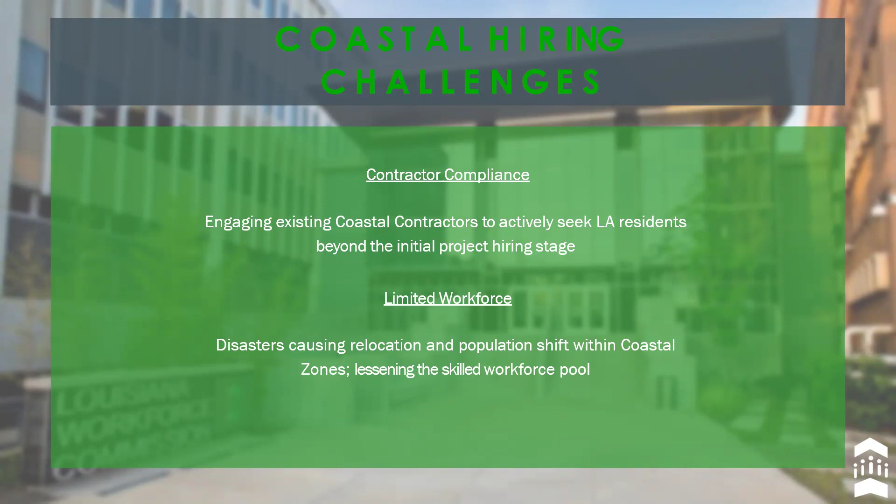And so we recognize that there are some hiring challenges. Some of those are the contractor compliance. And so that goes with engaging the existing coastal contractors to actively seek Louisiana residents beyond the initial project hiring stage. And so again, it goes to us being available at LWC to help continue to do the awareness, continue to do recruiting if that is what's needed. So it's not we put one ad out, we made one call to action and no one showed up, and then you hire from outside of the state.

We will continue to work with your organization or your business to aid you in staying in compliance, not just the spirit of compliance, but true compliance. And so that may look like 1 or 2 or 3 or 4 or more hiring events, but we're willing to do that and provide that service. And it doesn't cost anything to take advantage of these services from LWC.

The other challenge is the limited workforce. And so disasters have caused relocation and a population shift within the coastal zones. And then we understand that there's also a lessening of the skilled workforce in that labor in those areas. And so those are some things through partnership, through understanding what your organization provides, what you're needing. There may be an opportunity to partner with the local workforce development board who has training dollars for education.

We have the Coursera partnership, which is paid for through LWC. So there would not be a cost for you if you had an employee, current or potentially new, that you would like to gain a skill, be upskilled in. There's no cost for that. And so that's a part of what the partnership in LWC can offer to you as well.

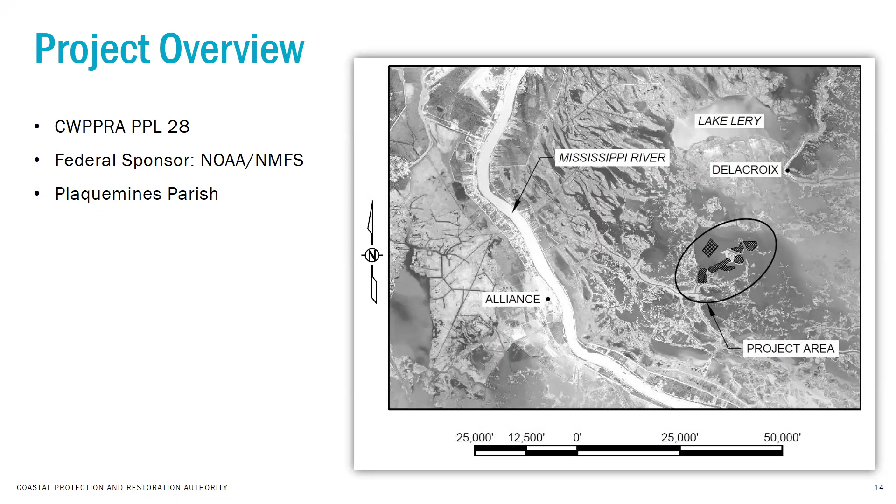So my name is Alex Holston, and I'll be presenting first on the Breton Land Bridge West Marsh Creation Project, or BS 38. So just a project overview. It's part of the CWPPRA program proposed in PPL 28. Our federal sponsor is NOAA, and it's in Plaquemines Parish.

So last industry day, this is what the project looked like. But since then, due to kind of a heads up from a nearby project, BS 32, we realized we needed to do some additional surveys of our project due to the changing landscape. So we did that in the fall, and updated the shape of our project.

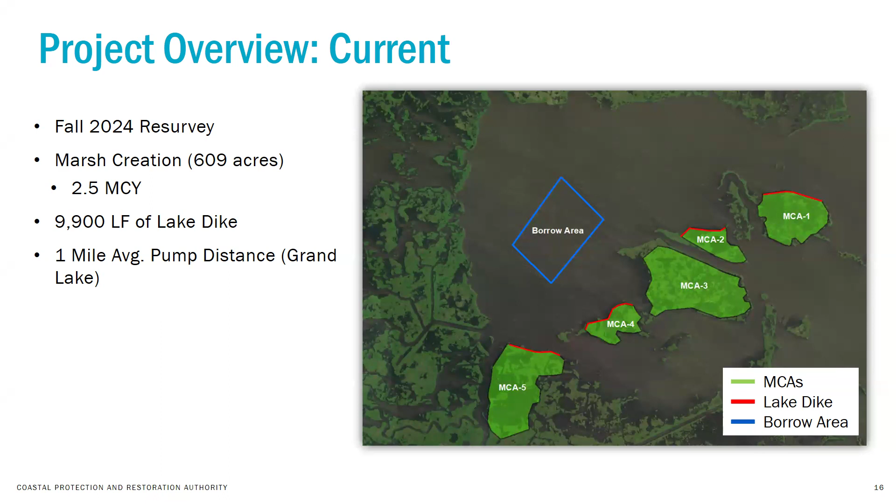So this is the current layout of the project. So currently we have 5 marsh creation areas, a total of 609 acres. That'll take about 2.5 million cubic yards of fill. About 10,000 feet of our lake dike feature, which is shown in the red on MCAs 1, 2, 4, and 5. And it'll use a nearby borrow source from Grand Lake.

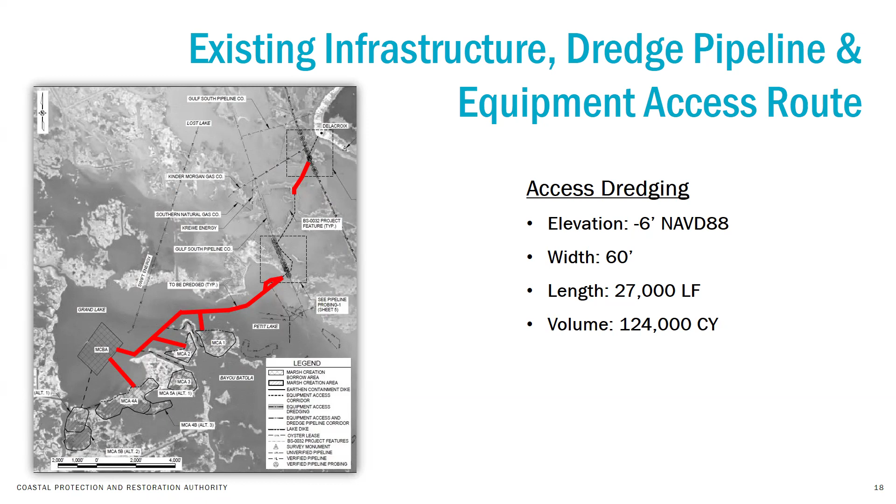And this slide also shows some areas where we've designed for access dredging, shown in the red. So any areas that are shallower than -6, we put in access dredging to allow for larger equipment to get to the project and help construct our lake dike features. So the template is down to a -6 elevation, 60-foot width, total length of about 27,000 linear feet, and total volume of about 124,000 cubic yards.

So onto the project features. Our earthen containment dikes will be built up to a +4 elevation with a 1/4 foot plus or minus tolerance, 5-foot crown width, 4-to-1 side slopes. Total containment dike length is about 40,000 linear feet. They'll utilize interior borrow that'll be backfilled.

And for the marsh creation areas, constructed marsh fill elevations, MCA 1 will be built to a +2.25 plus or minus 1/4 foot tolerance. And then the other MCAs 2 through 5 will be built to a +2.75 elevation.

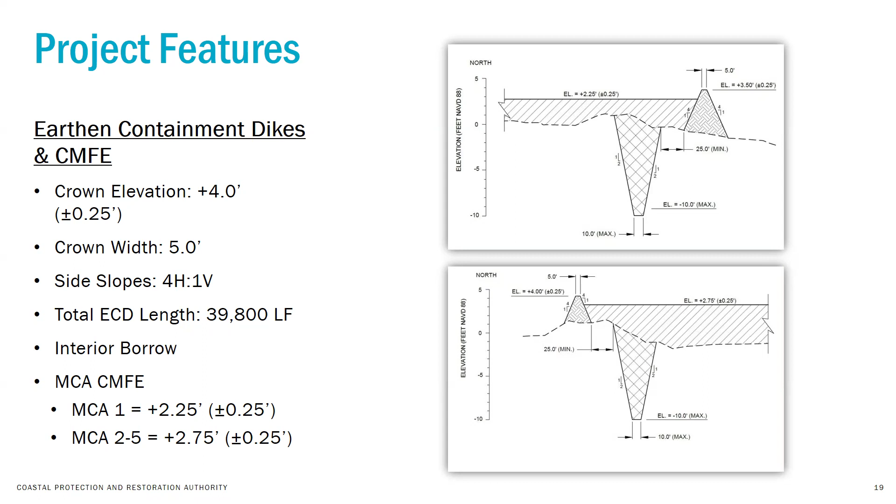And then for the borrow source, it's pulling from a nearby Grand Lake location. The average depth in the lake is about -5 foot elevation, and the cut depth will be down to -20, so 15 feet. The material in the borrow is primarily lean and fat clay layers mixed with a silt layer. And the 194-acre area contains about 4.5 million cubic yards available.

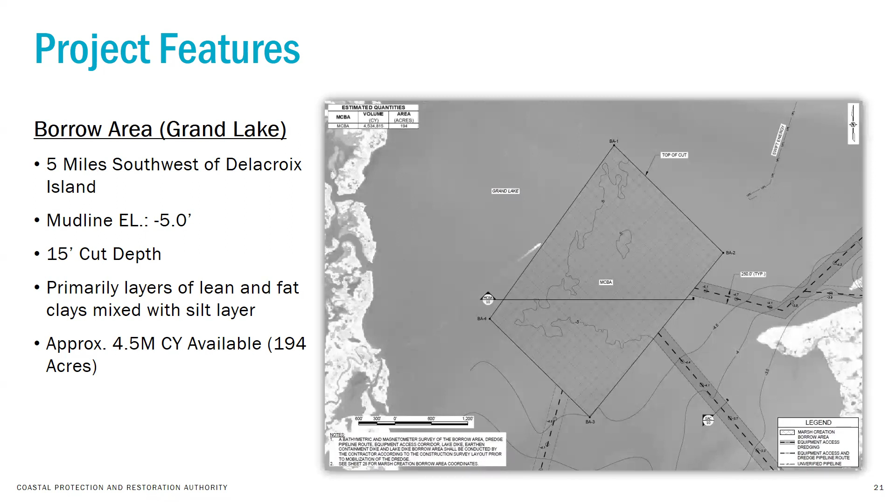And so the schedule for this project, we received phase 2 approval in January of 2022, received our construction permit in January 2023. The anticipated bid advertisement is this fall, and the estimated construction duration is 570 days. And I think we can take any questions that anybody has.

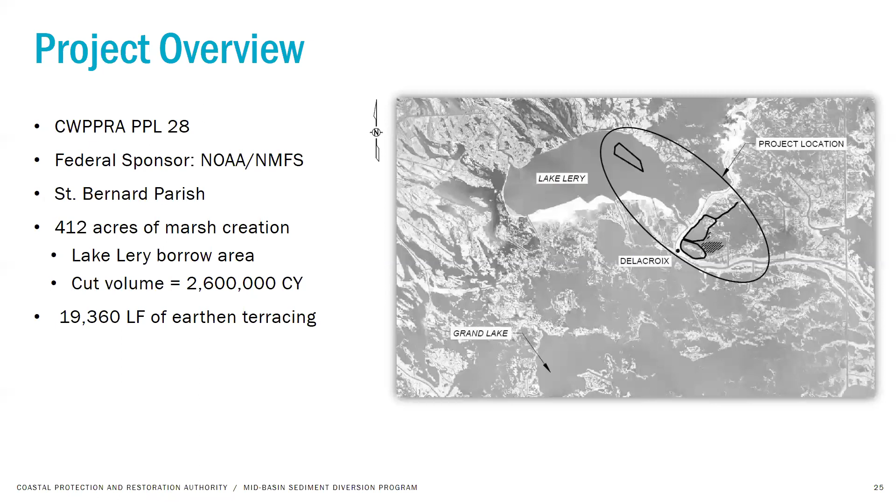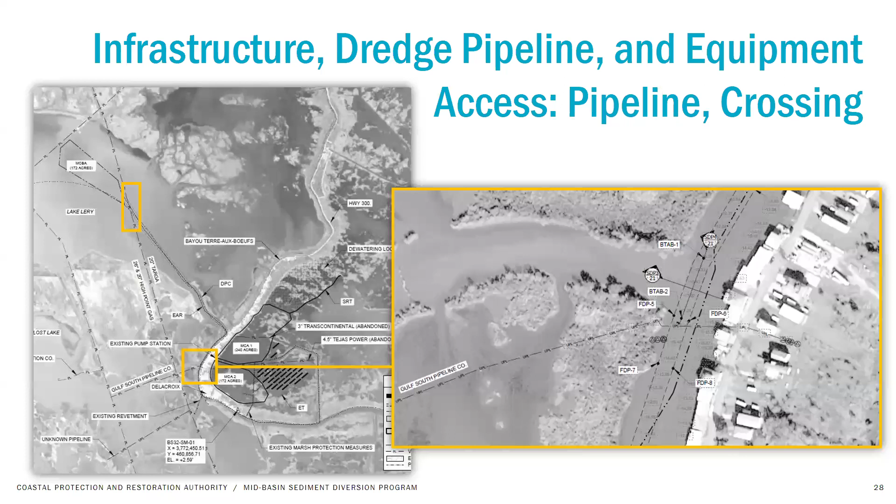And so this slide shows two locations where we have pipeline crossings. So the first one is showing just outside of our borrow area. There's 3 pipelines together where we will float the dredge pipe over in Lake Lery. And then near Delacroix, there's a single pipeline, a Gulf South pipeline, where we'll also float the dredge pipe over. And just ahead of that, there will also be a navigational crossing where Bayou Terre-aux-Boeufs connects to this waterway.

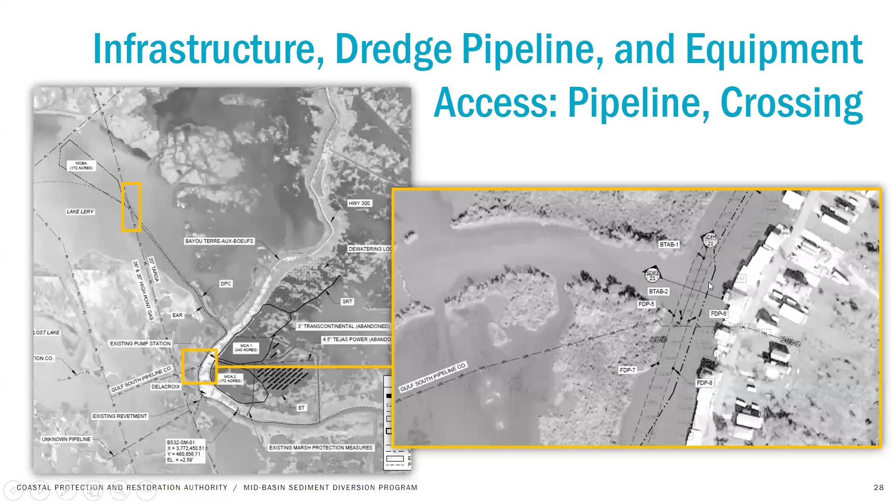And then we've got some measures in for protecting marsh and timber mats on the other side for any equipment crossing. But the details of that slip usage and cleanup are still being hammered out with the parish. But nearby, just further east, there's another route where we could cross and enter to get to the cells.

So for the project features, this is the borrow area from Lake Lery. It's about 6 miles pump distance. The existing elevation is about -5, and we'll have a cut elevation down to -20. The material in the borrow is a majority fat clay. And there is one avoidance area on the south edge of our cell that's a sunken boat. So we've got a 100-foot offset for that.

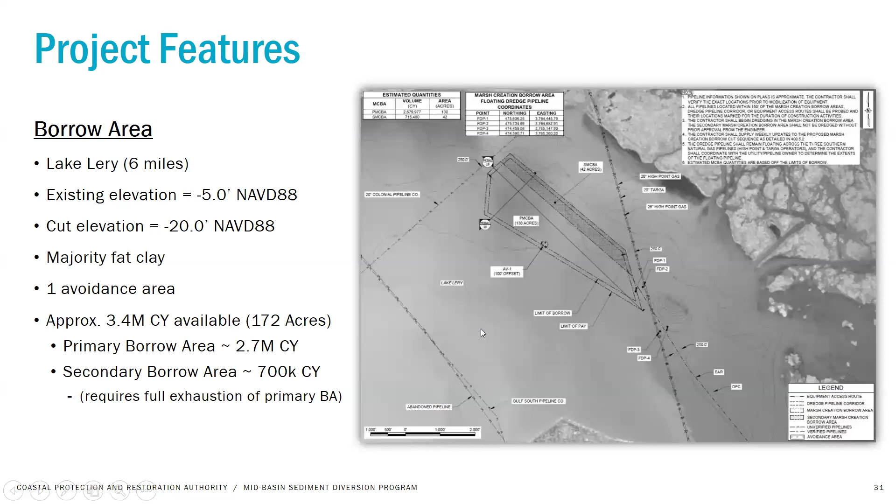For the marsh creation, total of 412 acres, both filled to a plus 3.25 with plus or minus quarter foot tolerance. MCA 1, the northern cell, is 240 acres with a cut volume of about 1.6 million cubic yards. The southern cell, MCA 2, is 172 acres with a cut volume of about 1 million cubic yards.

For the earthen containment dikes, they'll be built up to a plus 5 elevation, 5-foot crown width, 4-to-1 side slopes, about 16,000 linear feet. They will utilize interior borrow outside of the 4 highlighted areas.

We have 2 abandoned pipelines that cut through the cells, so in these areas we've got no excavation zones. On the west side of MCA 2, there's enough depth of cover, so the design will be to have that location as an equipment crossing spot for going over the pipelines.

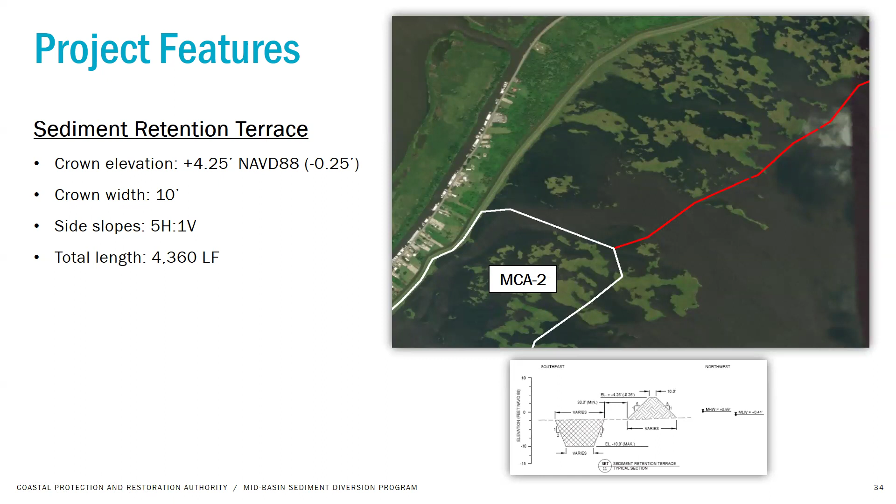Looking northeast off of that southern MCA 2, we've got a sediment retention terrace, the red line coming to the northeast. It will be built to a plus 4.25 with minus quarter foot tolerance, with a 10-foot crown width, 5 side slopes, and about 4,000 linear feet of that feature.

East of the 2 MCAs, we have a terrace field, 30 total terraces built to the same specifications as the previous retention terrace: plus 4.25 elevation, 10-foot crown width, 5 side slopes. Each terrace will be 500 feet long, for a total of 15,000 linear feet, spaced center line to center line, 250 feet apart.

Here's a summary of the estimated quantities. Key items: about 16,000 linear feet of ECDs, a total of about 19,000 linear feet of terracing, and 2.6 million cubic yards for MCA fill.

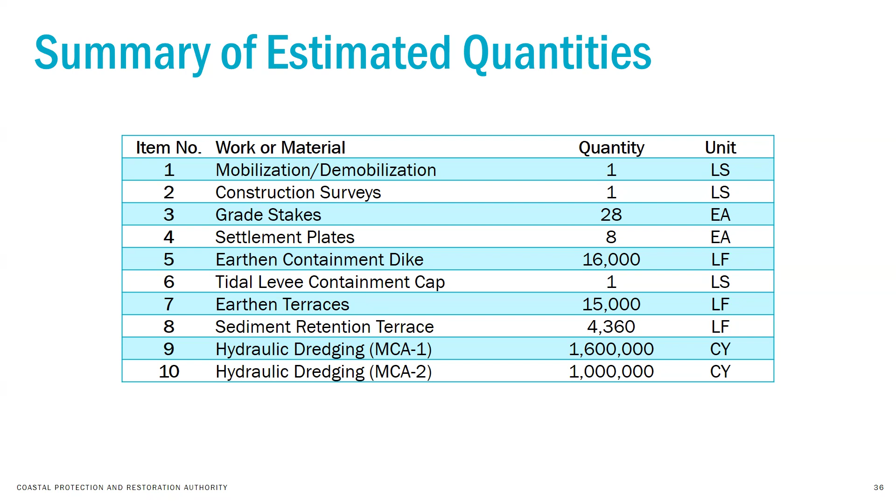For the schedule of this project, phase 2 funding was approved early last year. Their construction permit was received in Q3 of 2023. The anticipated bid advertisement will be Q3 or Q4 of this year, with an estimated construction duration of 550 days.

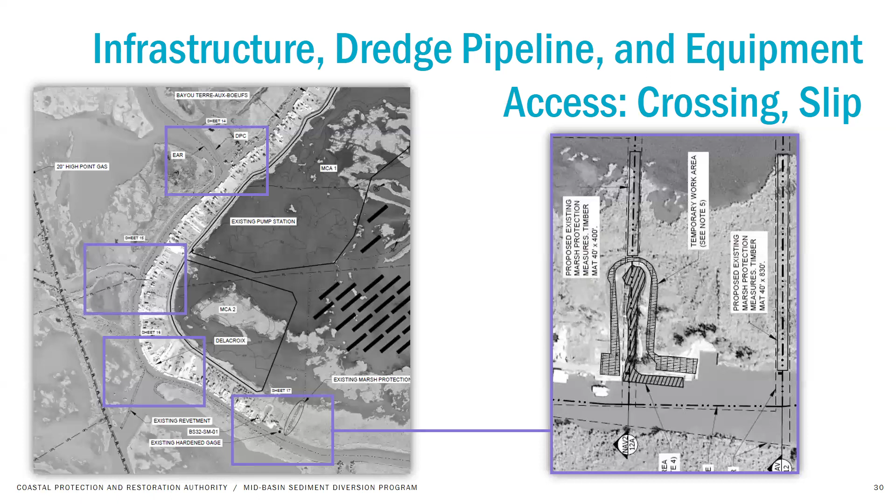Couple slides back, the non-excavation area for the dikes, the red boxes - how big are those red boxes for the non-excavation? Do those go through the containment? For those in attendance, the question has to do with some no-excavation areas near the containment dikes, asking the scale of them, and if they go through. We haven't built the levee through there. Just for clarity on how to construct the containment levee in areas that don't have excavation allowed within - I think relatively speaking it's going to be probably a pretty small footprint of no-work, no-excavation area, but I'll check on that. Yeah, I think the distance is 75 feet, and it will have containment built across it.

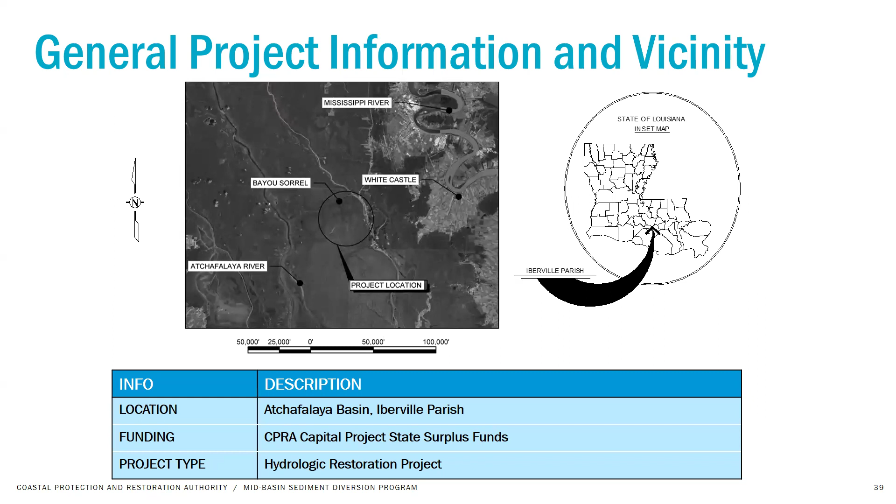All right, just an overview of the project. Again, the intent here is to do some spoil bank gapping and some shallow excavation of some existing old bayous, channels, little creeks to try to improve flow from the north to the south in the basin.

We're excavating about a total of 16,600 yards. That number here on the slide was updated with a recent design submittal we did last week. So again, that number is about 16,600 yards that we're going to be excavating from a total of 12 different sites. There are 3 sites off of the Protection Levee Canal to the east. We have a total of 7 sites off of Florida Gas Pipeline, and we have 2 sites off of Bayou Sorrel.

So Bayou Sorrel and the Protection Levee Canal both are fairly deep water access routes. To access off of this pipeline canal, you do have water access down in Saltmont Bayou up into the pipeline canal, but after that point, depending on the water levels, it's not going to likely be any kind of floating access down that canal.

So some of the project features. Again, we got 3 basic typical sections that just have to do with where we're excavating and where we're going to be placing the material. So this typical section here applies to 3 of the 12 sites that I mentioned.

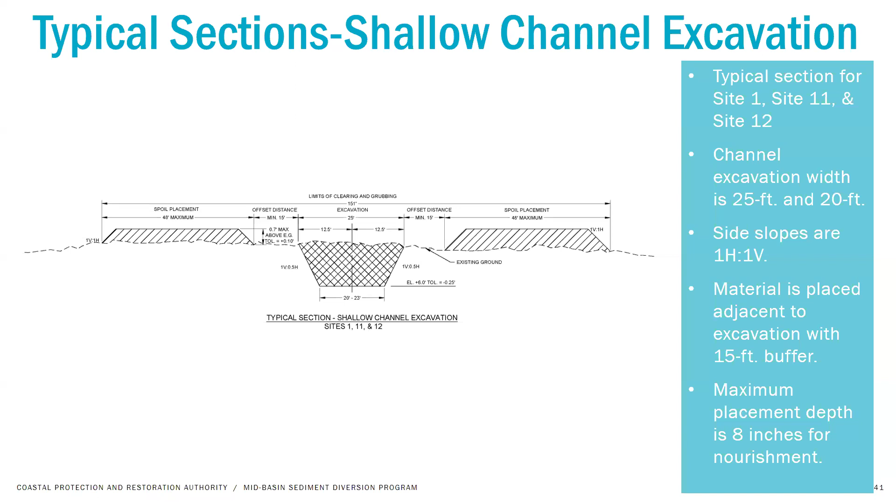Again, the idea here is to excavate a channel at some existing old bayous about 25 foot wide, and we're placing the material adjacent to the excavation here. The width of our placement varies, of course, depending on how much material we're going to be digging. And the placement depth is going to be limited here to about 8 inches, and that's to not change any habitat or encounter any mitigation requirements based off of this work here.

This is another typical section. This typical section here applies to work that's going to be taking place along the Florida Gas Pipeline. It's 7 of the sites. Again, we're going to be cutting gaps in some spoil banks on the pipeline canal. Most of them are 100 foot wide. One of them at the end on the west end is 50 foot wide. And the material that we cut out of those spoil banks, we're going to be placing adjacent to it back inside the pipeline canal.

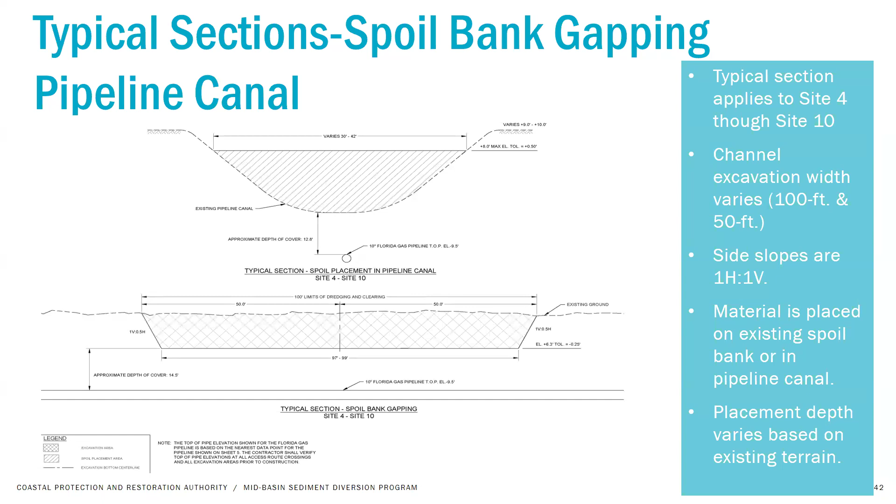This is the last typical section of excavation here and placement. This applies to 2 sites off of the Protection Levee Canal, sites 2 and 3. Again, we're going to cut about a 25 foot wide gap in some existing spoil banks. Place that material adjacent to those cuts on the actual spoil bank themselves.

This just gives an idea of the location of some of the features that I mentioned. This is sites 1, 2, and 3, off of the Protection Levee Canal on the east side of the project area. Again, site 1 to the north. This is one of those shallow bayous that we're going to be re-excavating and cleaning out, and we're placing material adjacent to that cut.

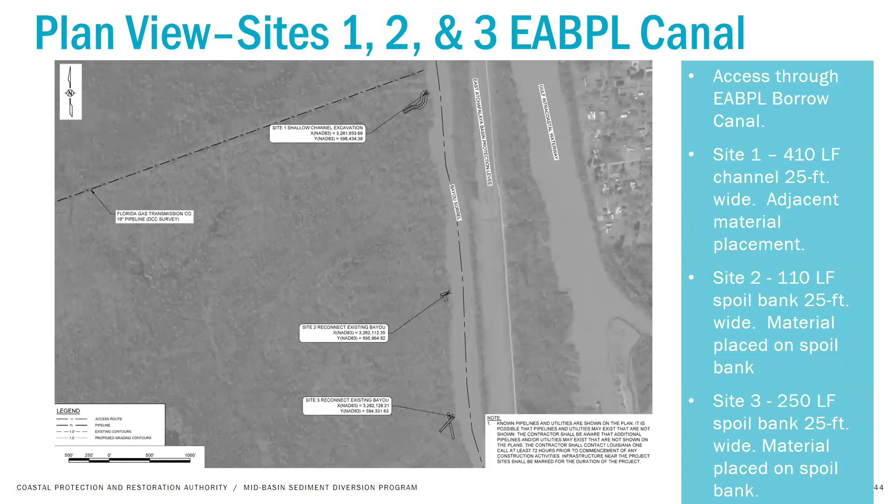Sites 2 and 3 on the southern end here, right off of the channel. Those are going to be gaps cut in the spoil bank with the material placed back on the spoil bank. Again, the length of these sites vary. The longest one is about 410 feet, that's site number 1. Site 2 is about 110 feet, and then site 3 is 250 feet long.

This is, again, just a little more information on the sites off of the pipeline canal. This is sites 4 through 10. Again, most of these we're going to cut a 100-foot gap in each of the spoil banks to allow some water exchange from north to south. Site 10 all the way to the west, that's going to be a 50-foot cut in the spoil bank. Again, this material that we take out is going to be placed inside of the pipeline canal.

Our last two sites, this is 11 and 12 off of Bayou Sorrel. Again, these are some old silted-in bayous that we're going to be cleaning out. Site 11 is 1,900 feet long. Site 12 is 2,170 feet long. We're going to cut a 20-foot channel through there and place the material that we cut adjacent to that excavation on either side.

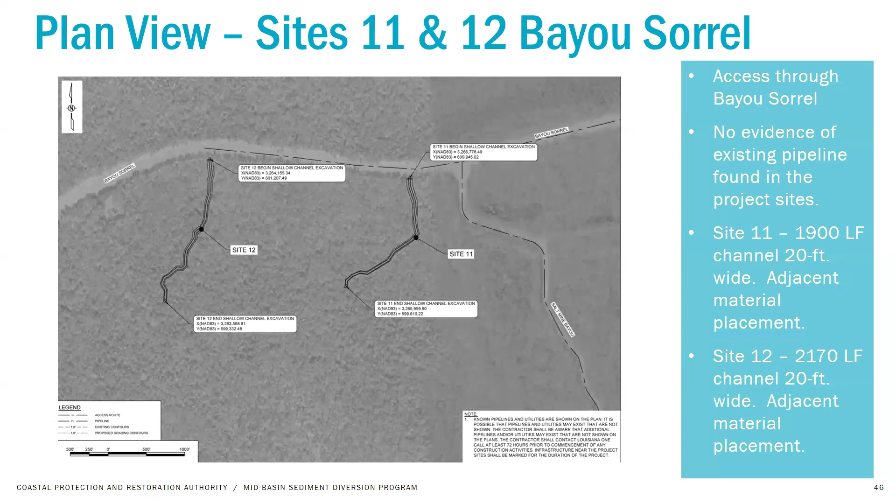All right, any questions?

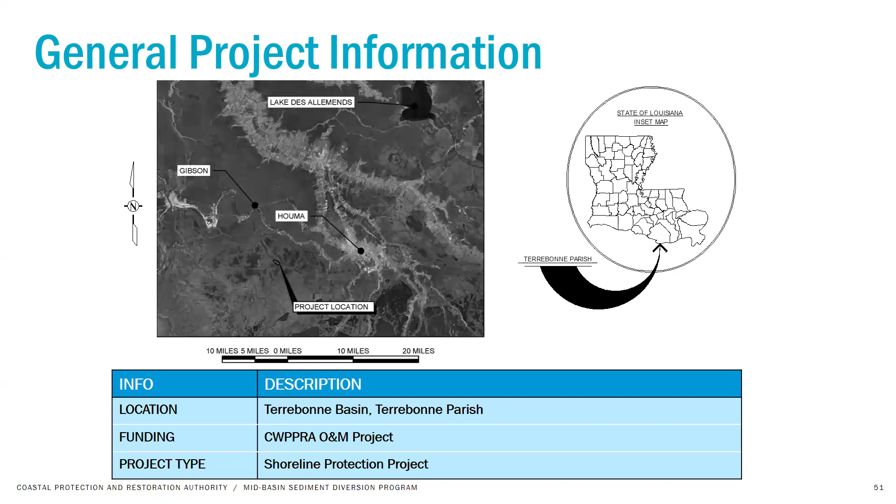This is just a closer view of where our project features are located, near the Lake Hackberry feature off the GIWW. We have 4 different sites where we're going to do shoreline protection at areas that have experienced a lot of erosion and channelization.

Most of the marsh in this area is what they call floating marsh, so continued wave action from passing boats just causes it to eat away.

So there are 4 different sites there. We're proposing to do some shoreline protection here, a total of about 2,500 feet of shoreline protection feature.

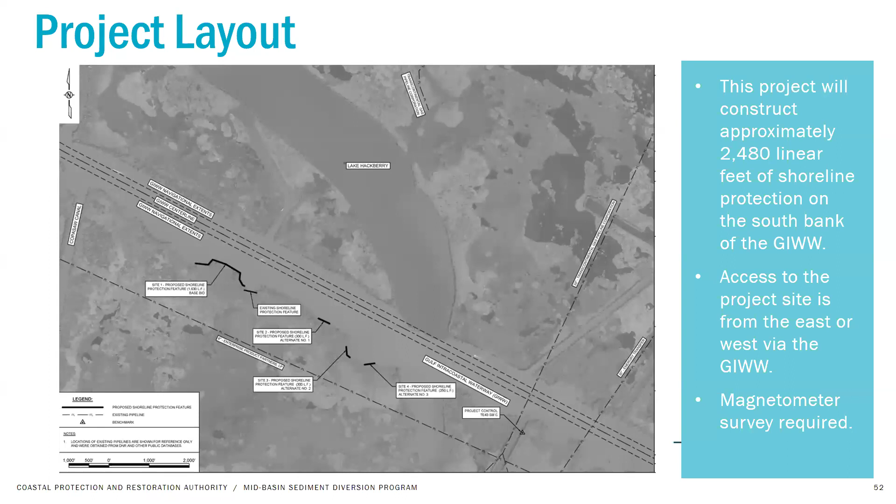The soil conditions out here are really bad. Previous attempts at shoreline protection using riprap and lightweight aggregate cores were successful for a period of time, but they experienced a lot of settlement. So this is the feature we're going to use on this project.

This particular type of feature was used on a demonstration project a number of years ago, a little further to the east, closer toward Mandalay. It seemed to function pretty well in breaking waves and retaining sediment behind it.

Again, another view of the shoreline protection. I mentioned the existing rock dike that's present. So our idea is to install that timber fencing just on the land side of the rock dike, with about a 10-foot offset.

There should be adequate water depth to get a material barge with a crane on it up to the dike and still be able to make that reach and drive those piles.

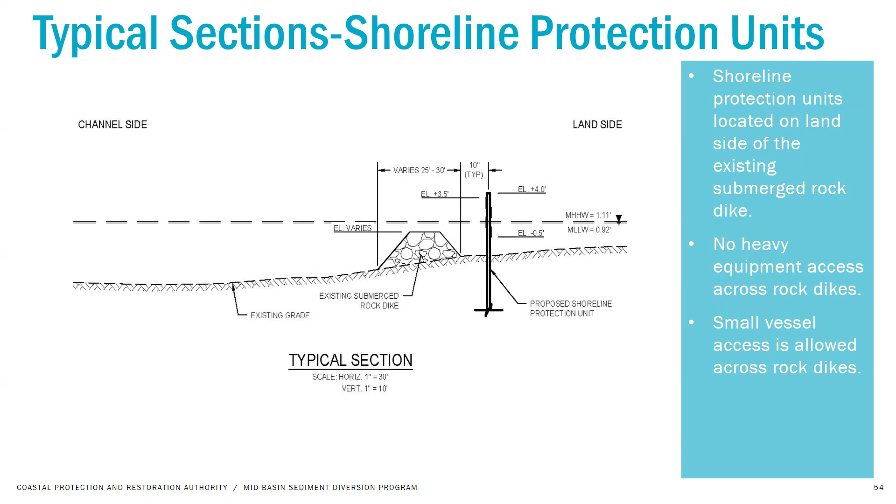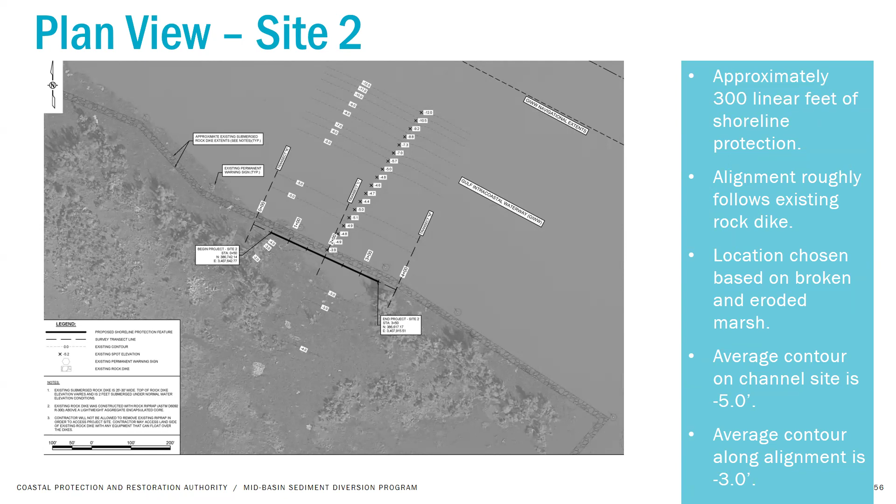The second site, like the rest of the sites, is a little shorter than the first one - this one's about 300 feet long, not too far from the first one. These are all relatively close to each other. Again, -5 on the outside, about -3 on the inside here.

Summary quantities: total at all 4 sites, we're looking at about 216 pilings and just under 30,000 board feet of timber fencing that we plan to use on this project.

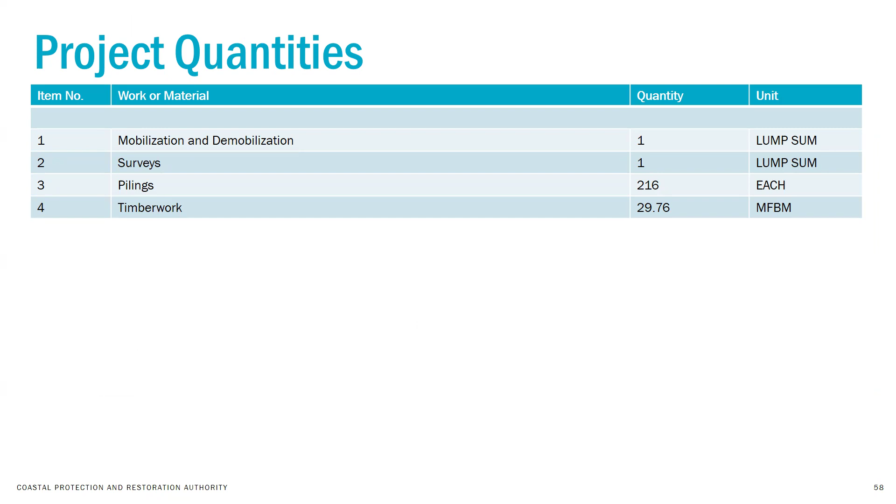The schedule: we submitted permits on this back in January. We have completed construction documents this month in March. We anticipate receiving permits in a few months, sometime during the summer. Soon after that, August timeframe, we will advertise for construction bids, with a construction timeframe starting sometime toward the end of the year. And again, we estimate about 60 calendar days required to complete this project.

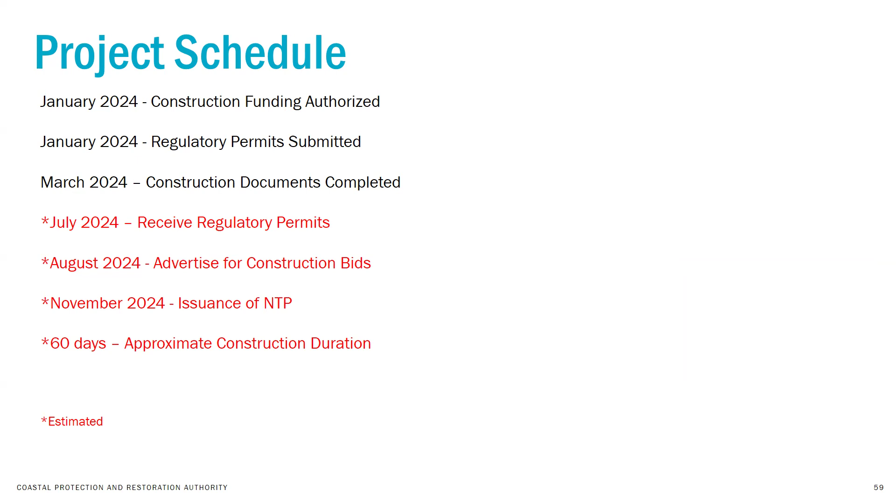With that, I'll open it up to any questions. Yeah, thanks, Kevin. I'm looking at the chat box. I don't see anything yet here. Give them a couple of minutes or so. If anyone has any in the room, please do ask away.

I guess hearing none, to try and get through the rest of the agenda, we're gonna have Mr. Steve Dartez, coastal engineering consultants, come up and discuss the TE 176 West Belle Headland Repair Project.

Afternoon, everybody. For some of y'all, this may be deja vu. So I'm here to talk to you about the West Belle Headland Repair Project, TE 176, which is basically to reconstruct what we lost in Hurricane Zeta during construction of the TE 143 project. It's in Lafourche Parish, just west of the Belle Pass jetties or Port Fourchon.

For borrow areas, we're going back to the OCS. We're expanding 2 previously excavated borrow areas that had cultural clearance. And for pump outs and conveyance corridors, we'll be reusing the 2 pump outs for West Belle that were used during the 143 project over by the pass. This project's being funded by FEMA.

So the template is basically the exact same template we had in 143, just a little shorter because they're only paying for us to replace what was lost at the time of the hurricane. So in blue and red, that's your beach and dune, and then in green is your marsh. One of the differences between this particular template and the previous one is this one will all be out of sand from the OCS. So containment is not required for this one.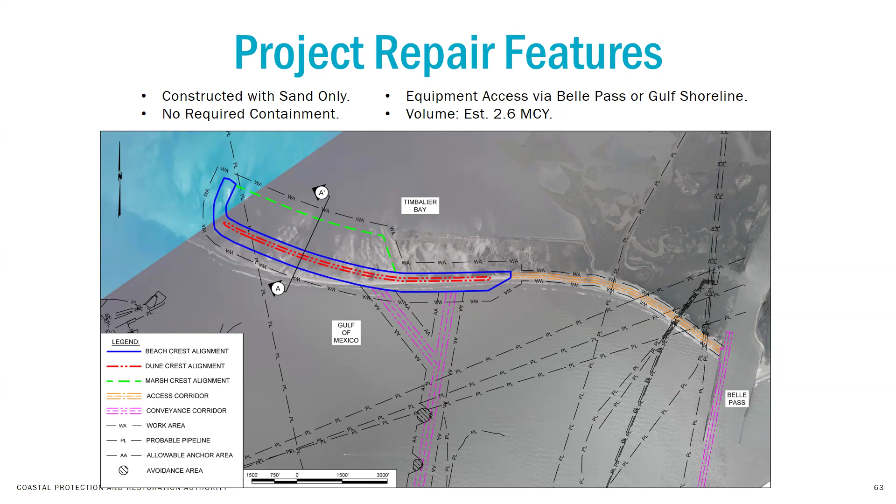We estimate that we have a 2.6 million cubic yard volume requirement that will be updated shortly. We'll be doing resurveys in the next month or so and getting those updated. Equipment access will be from Belle Pass or from the Gulf shoreline. Our previous access channel now is in much shallower water, and it was deemed to be not very effective to go back and redig that. In magenta, there are conveyance corridors coming in from offshore. And I'll get to those a little bit in a minute.

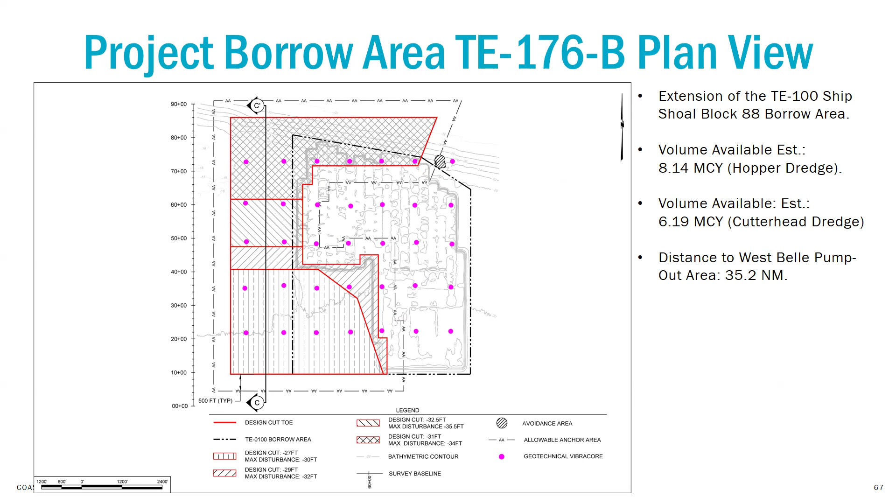And again, just a little cross section there showing our -27 down to -32.5 on the cuts. Conveyance corridors, I mentioned we used these previously in 143. The cyan hatched area is the old West Belle Marsh borrow area. That will be reused as a pump out area again.

The magenta lines are a conveyance corridor coming from this pump out area. They're 300 feet wide with a 250 foot per side allowable anchorage area. There are 2 avoidance areas near this corridor that we'll have to be cognizant of when utilizing it. It also includes the spur that we would put in through a permit mod during the 143 project.

The pump out area has got an average depth of about -33 based on our 2021 post-construction surveys, which were post-Ida. And then the corridor runs from about -28 up to the shoreline for that.

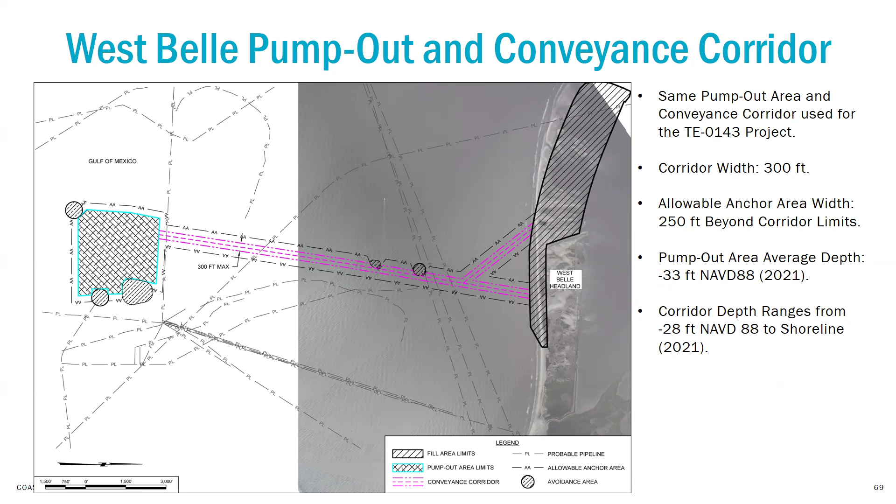The West Belle feeder beach pump out area, sorry for the West Belle being repeated so much, but that's what it is, was put in as a permit mod during the construction of 143 after the hurricanes. And it's just south of the Belle Pass jetties. The corridor runs actually between the navigation channel and the jetties. And then we come ashore where we constructed the West Belle feeder beach.

So the average depth in that pump out area is about -33 to -35 based on those post-construction surveys, and runs from about a -30 at the pump out area up to -10 where it joins in right here with West Belle feeder beach.

So the access I mentioned was from across the feeder beach. So equipment can come across the rocks, run along the shoreline, and you can just see the template sticking in right here on this image for access. Or if the weather conditions allow, you're welcome to bring any equipment you want into the work area from the Gulf side.

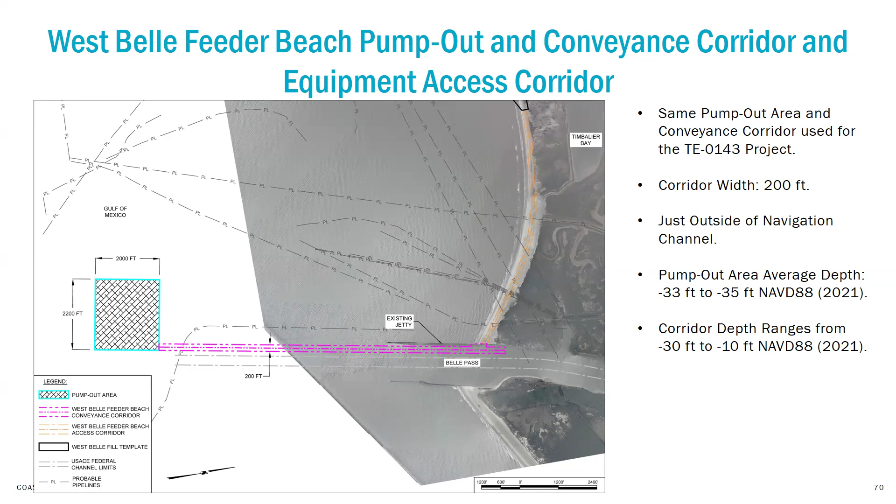Thanks, Steve. Yeah, some critical work there. First line of defense we'll talk about. Like your deja vu reference. Yeah, I knew it was coming. Anyone here in attendance, feel free to ask away. I'm looking at the chat box as well. I see one, Chuck Broussard.

Yes, sir. Have you tried to request a variance in your existing permit to allow for the service? Just to repeat, the gentleman's question had to do with pursuing a variance from a permit perspective to allow for additional disturbance. It looked to be about 3 to 4 feet based on our... They were 3 feet, and as in prior, it really has more to do with our negotiated agreement than the permit. And we can investigate that in due time with those agencies. We don't have... you can speak to the mic... we don't have our NNA just yet. So obviously you want to get that in hand first, and then we can evaluate that. But similar to previous experiences. But that's why I split the volumes up for you.

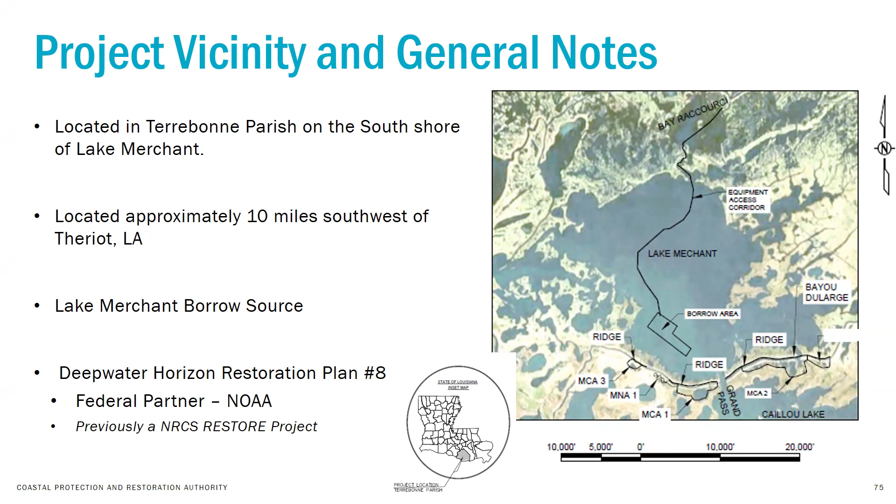Good afternoon. Like you said, Dylan Olson, I'll be presenting the Bayou Dularge Ridge and Marsh Creation, TE 170. The project is located in Terrebonne Parish, about 10 miles southwest of Theriot, Louisiana. It'll be a Lake Merchant borrow source, and this is a Deepwater Horizon Restoration Plan #8 project with the federal sponsor of NOAA.

The project includes 3 marsh creation areas and 22,400 linear feet of earthen ridge. The MCAs will be broken down to MCA 1, 2, and 3, as seen on the east and west side of Grand Pass here. There will also be 27,000 linear feet of earthen containment dikes. And as seen in the purple, we will also have 23 acres of marsh nourishment.

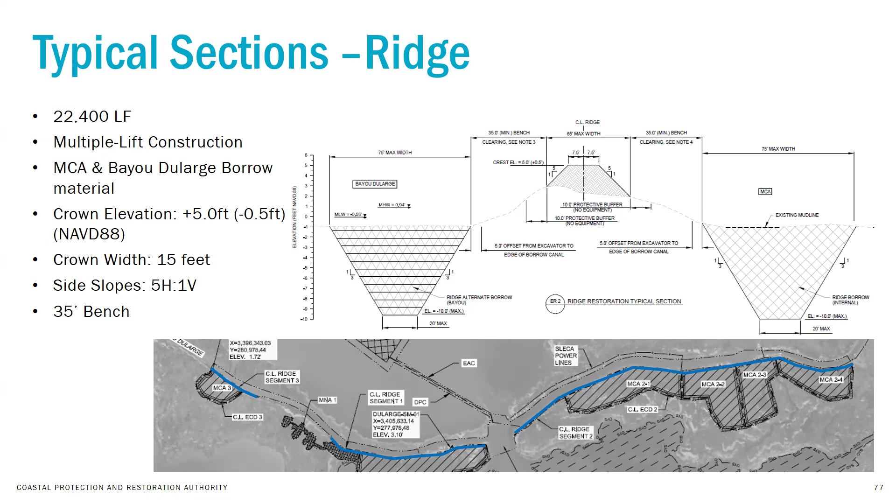Here's the typical section for the ridge. It will be a multiple lift construction using sources from within the MCAs where applicable and within Bayou Dularge where there is no MCA adjacent. The ridges will be built to elevation of +5 with 15-foot crown width and side slopes of 5 to 1. There are some camps along the existing ridge, and we'll have to build behind those to accommodate those.

Here's the typical section for the ECD and marsh fill. There will be 27,000 linear feet of ECDs built to 4.5 feet with 5-foot crowns and 4 to 1 side slopes. The max slurry elevation will be 3 to 2.5, depending on which MCA. And the existing ground in the area is approximately -2 in the water area and 0.6 where there's marsh.

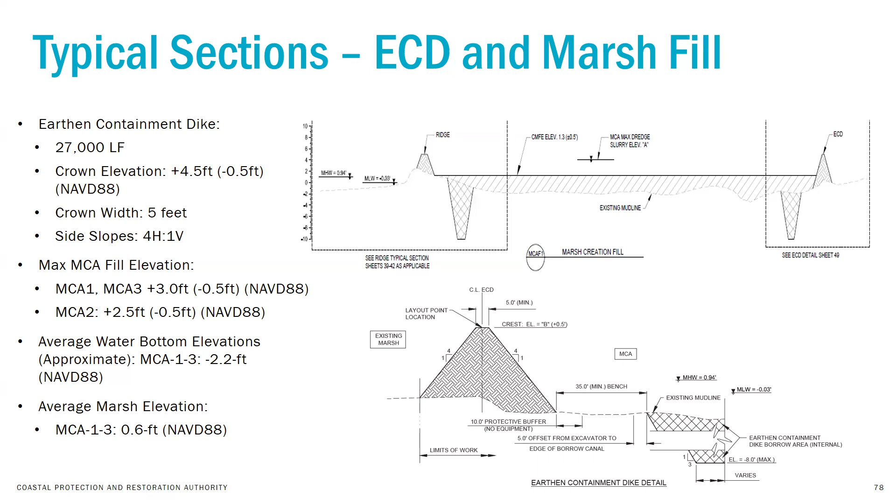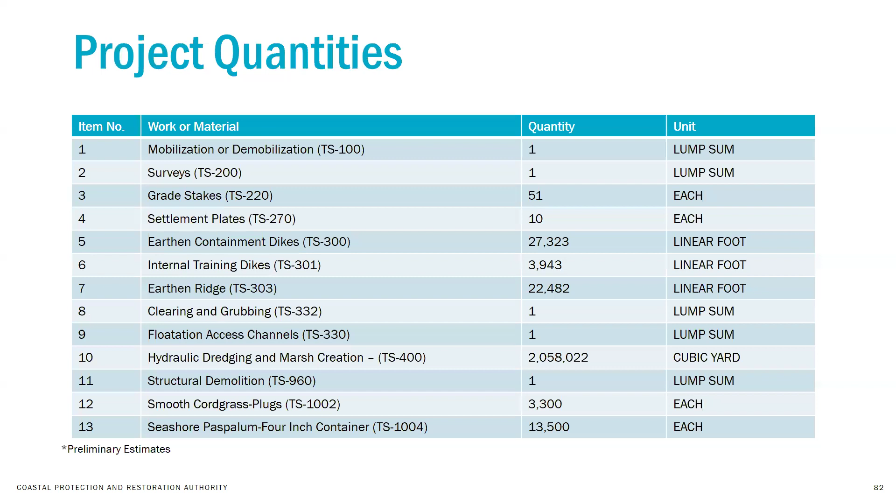Here are the project quantities. We mentioned most of these. Items 12 and 13, we will have vegetative planting along the ridge. That's what's shown here. Currently, we are doing some additional data collection and hoping to finish that up maybe this summer, where we'll move into final design and hopefully have land rights done by the end of this year, where we can then advertise for construction. Anticipate construction duration of 500 days. Questions?

Thank you, Bill. I'm looking at the chat. I don't see any yet. So we got one from Chuck Broussard. What's the depth of the access? The slide is too small. Yeah, the question was the depth of the access channel. -6 depth with 60-foot wide. Only permanent. Yes. I think that Tennessee gas pipeline is -13.

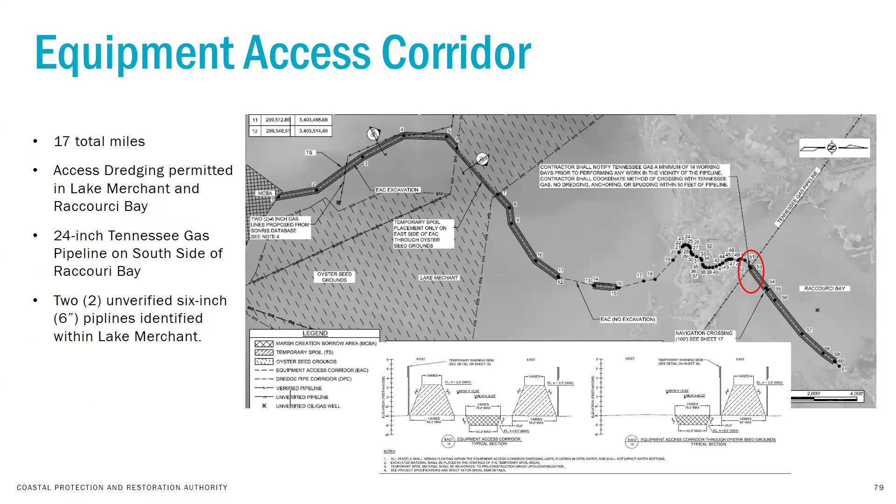It is adjacent to two recently constructed projects, the PO 33 Goose Point project and the PO 104 Bayou Bonfouca project, both to the southeast. Like those two projects, it also proposes to construct marsh using a Lake Pontchartrain borrow source, and it was approved under CWPPRA for phase 2 funding in December of 2022, with U.S. Fish and Wildlife Service serving as the federal sponsor.

So this slide shows a layout of the entire project area. I'll briefly go through each of these features on this slide and then get into details of them through the rest of the presentation. There's a total of 7 marsh creation areas spanning approximately 633 acres and requiring about 2.5 million cubic yards of fill material. All 7 of the marsh creation areas will be fully contained, and that amounts to about 62,000 linear feet of earthen containment dike, some of which will be constructed using external borrow sources.

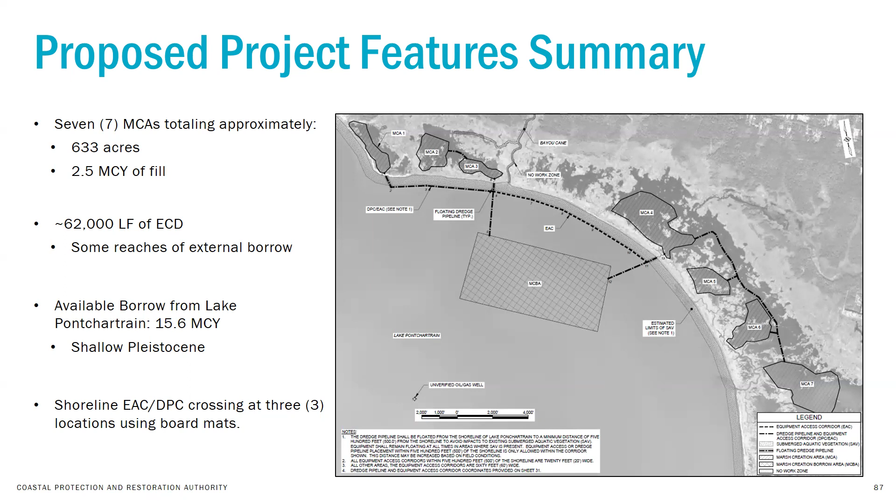So starting first talking about the containment dike and the marsh fill, it's probably a little bit difficult to see on the screen here, but the typical section of the containment and the marsh creation areas are shown in the bottom left here. Again, there's about 62,000 linear feet of earthen containment dike spread across the 7 marsh creation areas. And a pretty sizable earthen containment dike for this project, about 6.5 foot max for all of the areas except for MCA 7. And one of the big reasons for that is due to the material we're expected to encounter in the borrow area. It's very shallow Pleistocene that could potentially result in slurry elevations as high as plus 5.5 feet in order for us to get that material into those areas. So that's why you're seeing such sizable sections here.

For MCA 7, the soil conditions are a little worse than what we're seeing in the rest of the project area. So those are a foot lower and with 4-on-1 side slopes versus the 3-on-1 that you'll see for the rest of the marsh creation areas. For all the earthen containment dikes, there's a 5-foot crown width. And as I mentioned at the very beginning of the presentation, each portion of marsh creation areas will have reaches of external borrow, serving as the primary borrow source for that specific portion of earthen containment, with some secondary internal borrow areas permitted as well.

For the marsh fill elevation, again, that maximum elevation for all areas except for MCA 7 is plus 5.5 feet, or MCA 7 is a foot lower at plus 4.5 feet. So a little bit different for this project. It'll be based on volume for acceptance rather than elevation, due to the fact that the materials we're expecting to encounter in the borrow area could potentially result in slurry elevations ranging anywhere from a foot to 1.5 foot difference. So that's really the ultimate driving force behind the elevations you're seeing here on the screen right now. The average mudline elevations for a majority of the project range from about -1 to -1.5, with 2 areas on the east side of the project, MCA 4 and MCA 6, close to -1.5 to -2 feet.

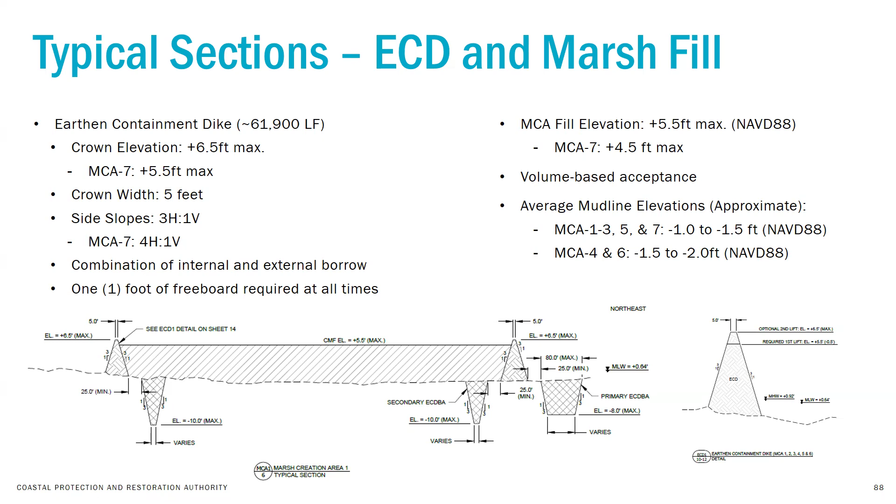So focusing in on the borrow area now in Lake Pontchartrain, as I mentioned earlier, it's about 1 mile to 1.5 miles from the shoreline. The average water bottom elevation in this area is about -11 feet. We're currently permitting a 15-foot cut, so a bottom elevation of about -26 throughout the borrow area. The material that we've encountered from the geotech borings was predominantly stiff to firm lean clays and fat clays, with some pockets of sand in there in the upper 10 feet. However, below that is pretty much strictly Pleistocene material, with some potential for clay balling, as we've seen on the past Goose Point projects, as well as the Bayou Bonfouca projects.

So this slide goes into a little bit more of the detail of the expected clay balling behavior based off of what we've seen on the past Pontchartrain projects. Basically, what you're seeing here on the right side of the screen is a plot of the liquidity index of the materials as a result of the geotech analysis.

On the left side, the red line is the Bonfouca project, and all the way on the right side over here in yellow is the Goose Point project. The Bayou Cane points seem to fall in between those 2 projects based on what we've seen from the lab data. So we are expecting, based on what we observed during construction of those 2 projects, that likely there will be some clay ball potential for this project as well.

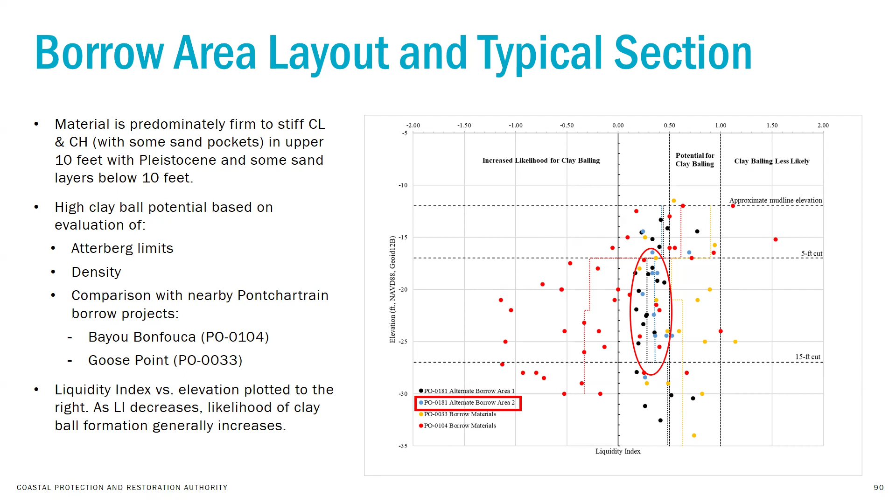And then lastly, this is showing an overview of the dredge pipe and equipment access corridors. The equipment access comes from that borrow area to the shoreline of Lake Pontchartrain, where there are 3 total crossings permitted for access and dredge pipeline placement into the marsh creation areas. The predominant reason for that is because Bayou Cane is a scenic waterway. We don't want to allow access or dredge pipe placement in those areas.

And additionally, the Big Branch National Wildlife Refuge, which owns the lands on the east side of the project, MCA 4 through MCA 7, has requested us to not use those existing tidal creeks as equipment access either. Within 500 feet of the shoreline, there are existing grass beds present. And so we are asking the contractor, per permit requirements, to float all the dredge pipeline as well as any equipment from that distance to the shoreline of Lake Pontchartrain.

Once you reach the shoreline of Lake Pontchartrain, there are three crossings that are denoted here on the screen: one at MCA 1, one at 3, and one at 4. That'll be accessed directly over the shoreline using board mats to help mitigate impacts to the existing shore. The pump distance ranges anywhere from about 1.5 miles to 4 miles, with an average right around 2.5 miles.

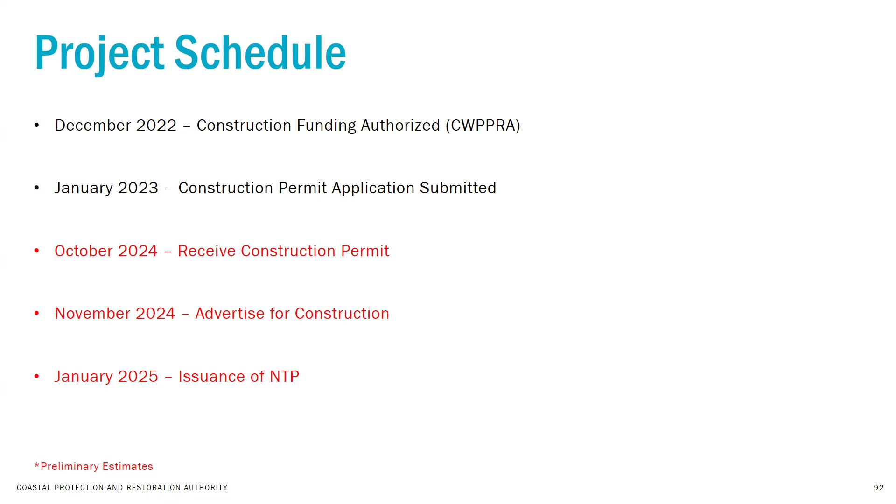Good job, Adam. See none in the chat box. Anybody has any in the room, you can take them now.

Hearing none, Adam is the next presenter as well on the CS 87A project, Calcasieu Sabine large scale marsh and hydrologic restoration. Thanks, Jacques. As Jacques said, this is the Calcasieu Sabine large scale marsh and hydrologic restoration. Today I'm going to focus in on CS 87A, which consists of the lake rim drainage structures.

So this project is located in Cameron Parish, within the Cameron Creole watershed along the eastern shoreline of Calcasieu Lake, as you can see in the figure here. There are 7 proposed gravity drainage structures with backflow prevention proposed along that eastern bank. It's adjacent to the previously constructed CS 54 project and the No Name Bayou project CS 78, which has recently begun construction.

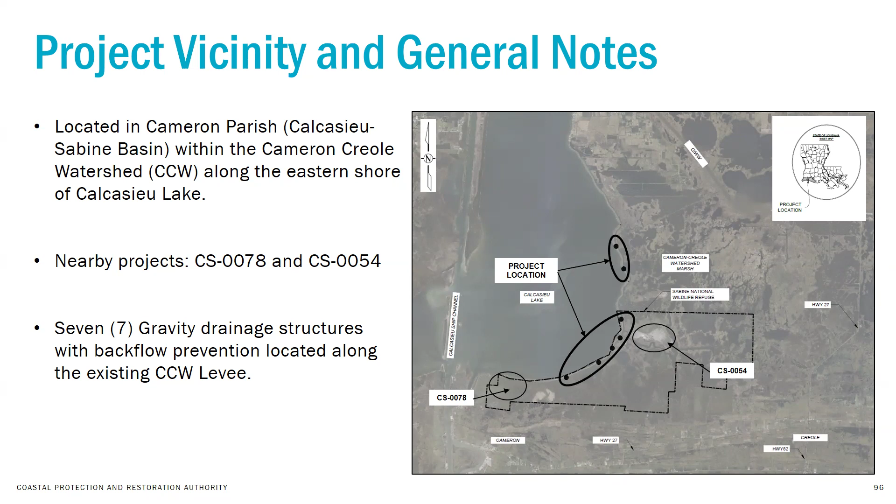So for these 7 drainage structures, the final location and capacities were determined through some preliminary modeling efforts performed by Mott MacDonald, with some additional HEC-RAS modeling performed to hone in on the final project benefits, as well as the specifics of some of the features you're going to see today pertaining to the 60-inch diameter culverts, such as the invert elevation, the slope, and the length of these features.

So each of these structures consists of multiple 60-inch diameter culverts. You can see 3 of them include 17 culverts, 2 of them have 23 culverts, and the remaining 2 have 31 of these culverts.

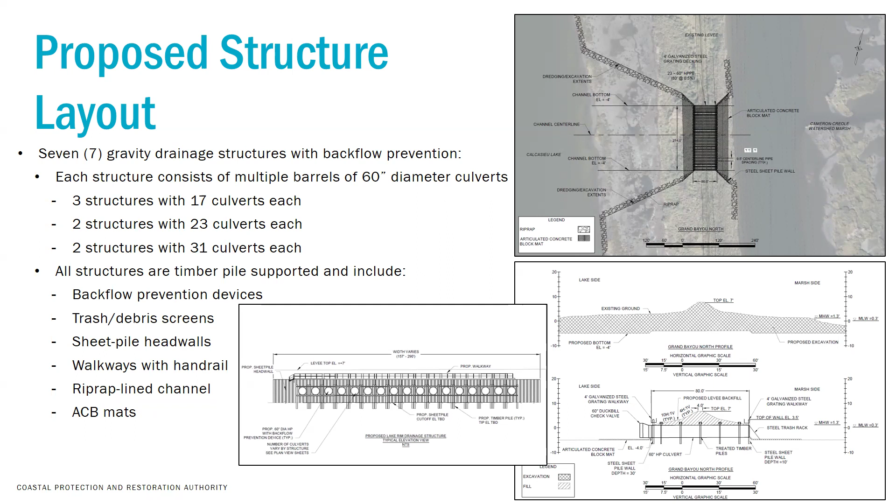All of these structures will be supported with timber piles and include features like the backflow prevention devices, such as the duckbill check valves or inline check valves, trash and debris screens to prevent clogging of the culverts, the sheet pile head walls, which you can see on the bottom left typical section here, walkways with handrails on both sides of the project feature, riprap lined channels on both the marsh side and the lake side, as well as articulated concrete mats on both sides to help reduce scour.

In addition, each of the 7 drainage structures has temporary flotation channels on the Calcasieu Lake side with 50-foot bottom widths and 1.5 on one side slopes, with temporary side cast material that will be backfilled upon completion of construction activities.

This is just an overview of equipment access to the project. As you can see, the equipment access routes come in through Calcasieu Lake up to each of those 7 structures on the eastern shoreline of Calcasieu Lake. Within each of those boxes, not really sure how well you can see them here on the screen, but that's where the flotation channels will be allowed.

It's important to note that Calcasieu Lake is a Tier 2 oyster seed ground, so there will not be any disturbance of water bottoms permitted outside of those work areas that I showed on the previous slide. Within the lake itself, there will be no wheel washing or prop washing allowed along those access routes. That route is 60 feet in width as permitted, and it is fairly shallow in Calcasieu Lake, so it's anticipated that shallow draft barges may be required to construct these features.

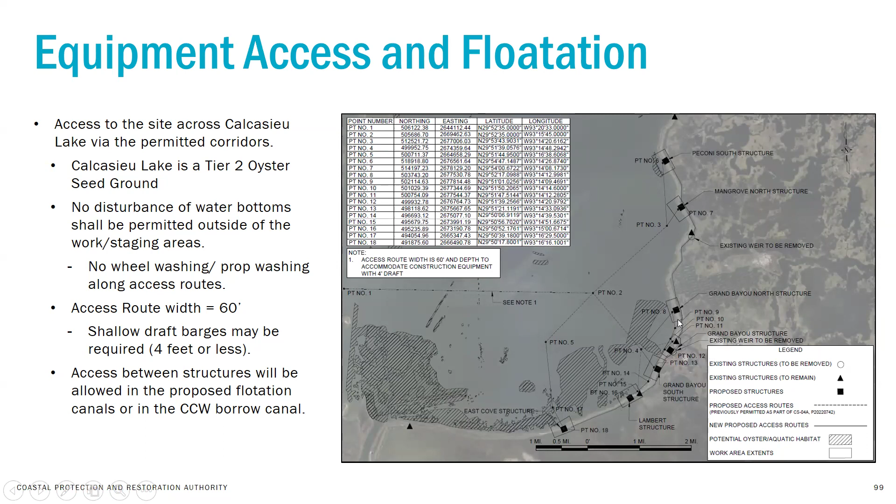Just to briefly go over the schedule, the construction permit was applied for a couple weeks back. We're hoping to be able to receive that permit sometime in the fall of this year and hopefully advertise sometime in the beginning of 2025.

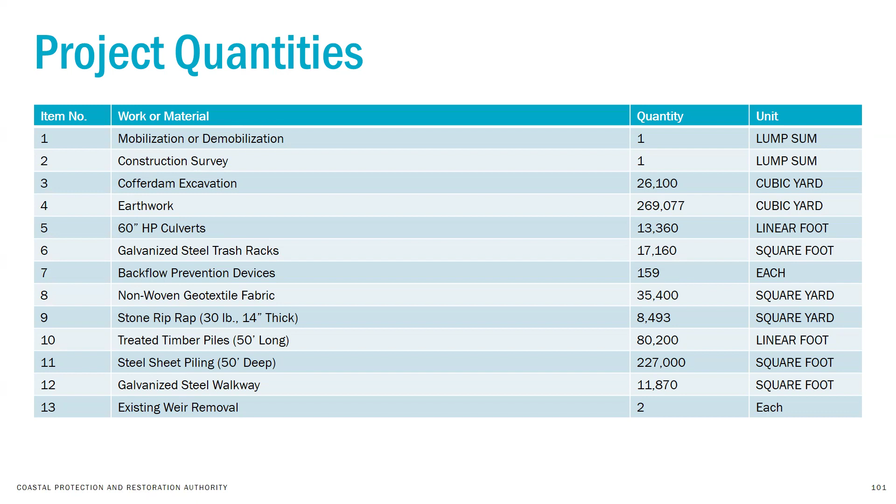Just an overview of the quantities. Again, I won't go through each of these in detail. There's about 300,000 cubic yards roughly of earthwork required for those 7 total drainage structures. Just over 13,000 feet of those 60-inch culverts, each requiring some kind of backflow prevention device. And then you see the timber piles associated with the support for each of those structures, and about 227,000 square feet of steel sheet piling for the head wall feature.

And with that, I'll open it up to any questions.

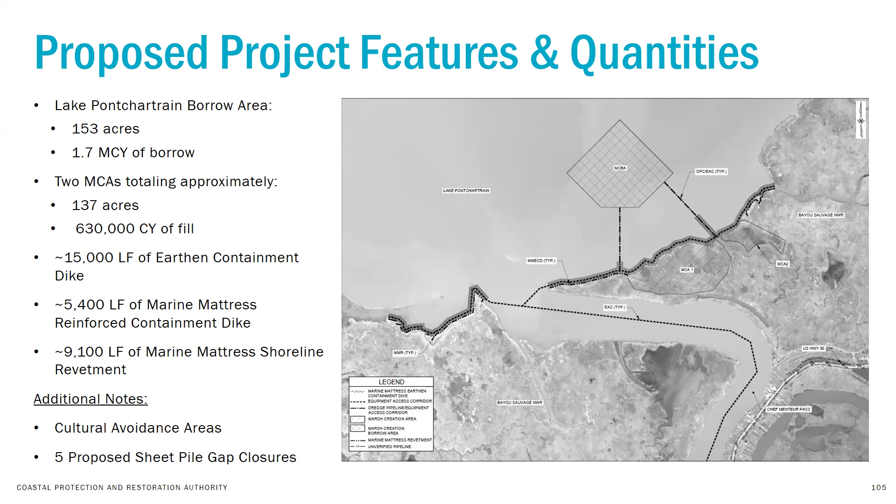So here's a layout of our borrow area. You can see our 7 avoidance areas there, and they require a 50-meter radius buffer zone. The material in our borrow area is mixed sediment—there are some sands and silts within it, but it is primarily soft clays in the upper 20 feet.

Our cut elevation is minus 15 feet. As mentioned before, there is 1.7 million cubic yards available, but we only need 630,000 cubic yards for the marsh creation areas. The max pump distance from the borrow area to the furthest points of the marsh creation areas is about 1.5 miles. At the bottom of this slide, you can see a section of the borrow area.

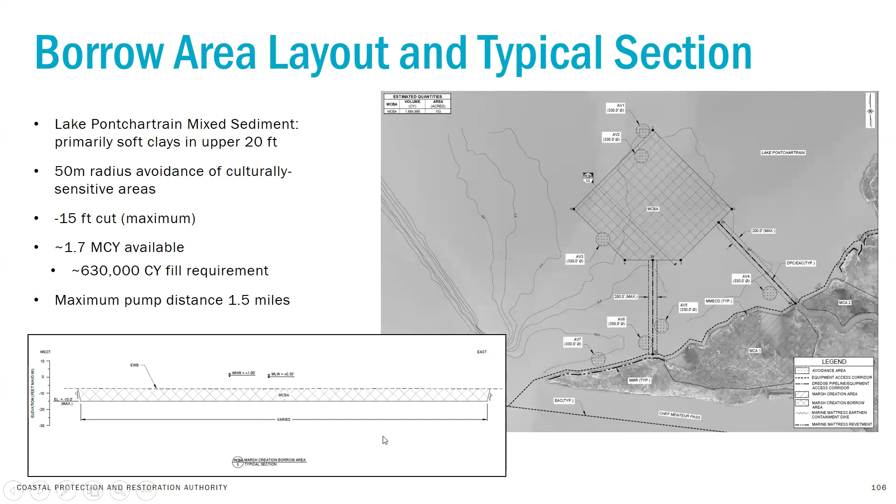Backing up here to see the entirety of this Bayou Sauvage National Wildlife Refuge relative to our project features. We have not identified any pipelines or flow lines that would affect the project, which is positive. We anticipate equipment access to come from the Intracoastal Waterway to the south and up Chef Menteur Pass to the borrow area. We do not anticipate access dredging being needed to get the dredge to the borrow area.

We have 2 dredge pipeline corridors going to each of the 2 cells, and as mentioned, the maximum anticipated pump distance is 1.5 miles. We have flotation channels and temporary spoil placement areas that follow the entirety of the shoreline protection features, totaling 14,500 linear feet, if access dredging is required to get the barge up to the shore. There are also cultural avoidance areas within these flotation channels, and I will show that a little closer here.

This is the western feature on the west side of Chef Menteur Pass. It is entirely the revetment type where the mattress is installed onto the existing shoreline, and the cultural areas are here along that point. So light loading of the barge or double handling of material might be needed to avoid affecting these areas.

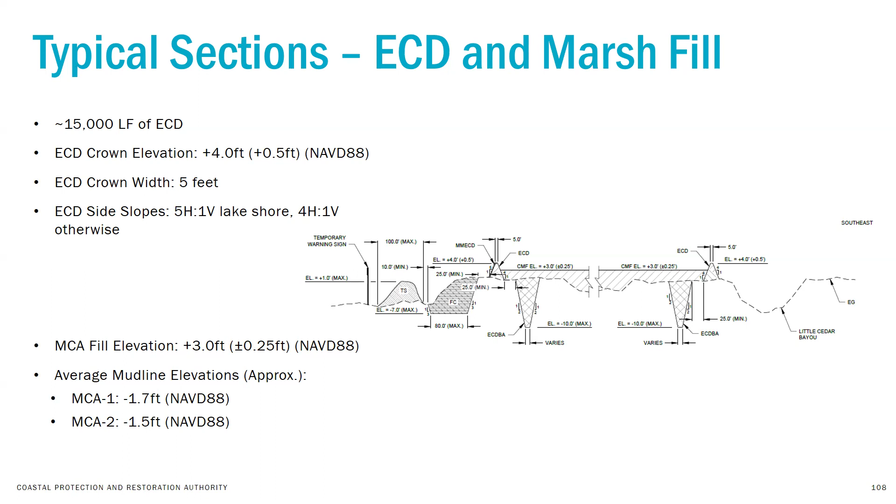This is a look at the locations of our sheet pile closures. They occur at crossings where the containment dike would be crossing a tidal channel that is deeper than -3. There are 3 located within MCA 1 and 2 within MCA 2.

They will be driven to an elevation of -26, and the top elevation will be +4, which matches the containment dikes. They will be reinforced with a sand berm built to a +1 with 3-to-1 side slopes.

Here are some typical sections of those marine mattresses. The first one is representing the shoreline revetment type. It is an 8-inch thick mattress, 30 feet long with the first 12 feet placed horizontally on the existing shoreline, and the rest graded to a 4-to-1 side slope down into the water, with excess material placed onto the toe to prevent sliding and scour. All of the mattresses will be placed on top of geotextile fabric as well.

The bottom image is of the marine mattresses placed on top of the containment dikes. These are also 8-inch thick, but they are 40 feet long. They will be placed across the top of the dike and follow the 5-to-1 side slope down into the water, with excess material placed on the toe.

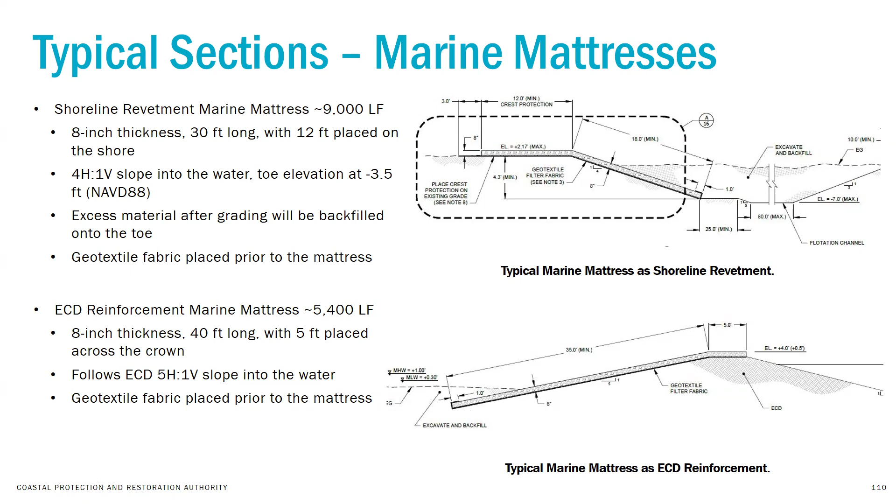Another component of the marine mattress revetment segments are what we call riprap revetment terminations. These are rock riprap caps that protect the exposed ends of the marine mattresses from wave action, and they consist of a geogrid composite layer at the bottom with a bedding stone layer, and then larger stone riprap on top. Their cross-sectional properties are similar to that of the marine mattress, where there is a length of it placed onto the existing shoreline, and it is graded down to the water at a 3-to-1 side slope.

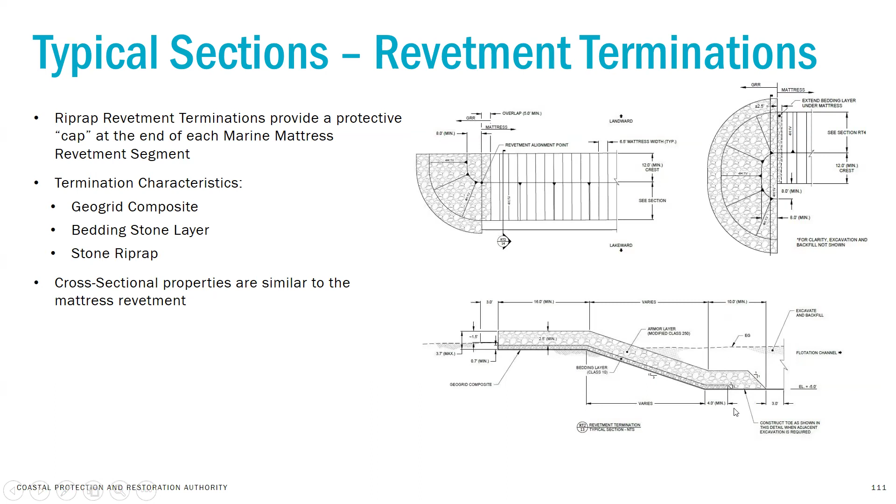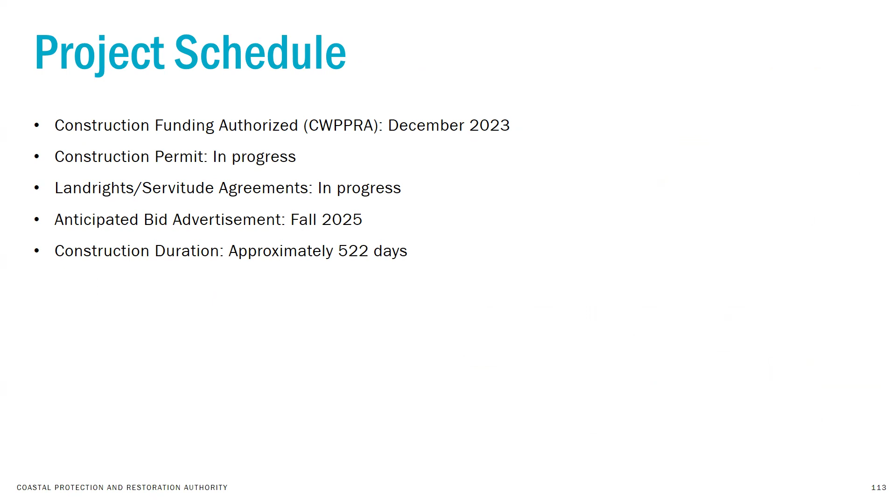A look at our project schedule. We were authorized construction funding by CWPPRA this past December. We're currently working on the construction permit and getting servitude agreements. We anticipate the construction bid advertisement next fall, and the construction duration is estimated to be 522 days. And that's it.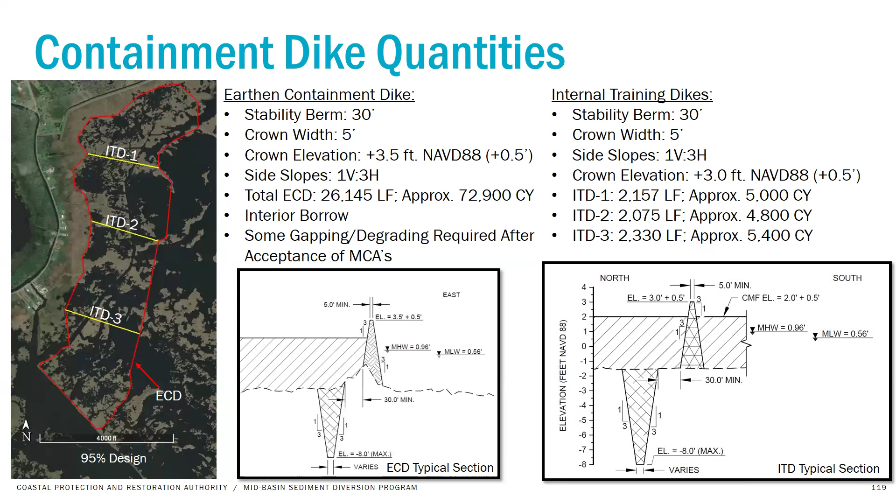The borrow area is in Lake Lery, divided into a primary and secondary borrow area. The primary borrow area is 111 acres and will provide up to 2.7 million cubic yards, which is more than enough for our project. The secondary borrow area is 128 acres and will provide up to 3.1 million cubic yards of material.

It will require engineer approval and full exhaustion of the primary borrow area to use. The average bottom elevation of Lake Lery is -5 feet, and the proposed depth of cut for the dredge is 15 feet, so that's a max dredge cut elevation of -20 feet.

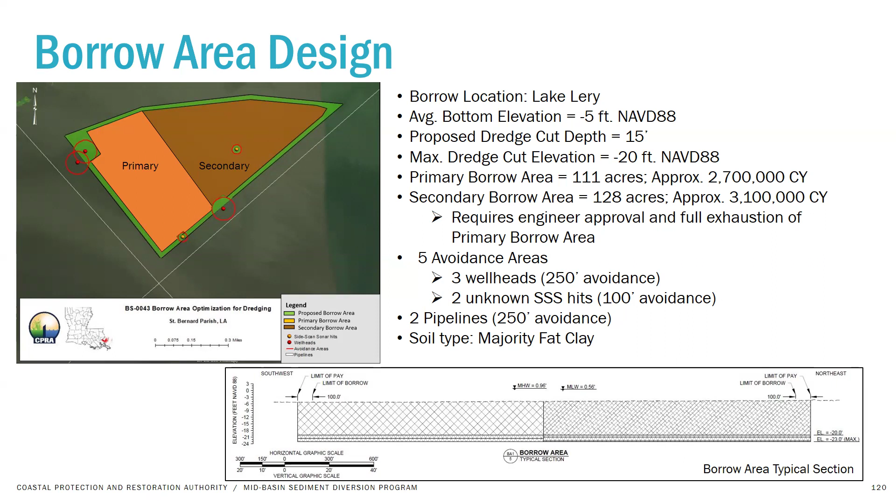And all 4 MCAs will total about 2,008,947 cubic yards.

The dredge pipe corridor will have 3 navigation crossings in Bayou Terre aux Boeufs. Both navigation crossings 1 and 2 will require some excavation, and the third one will have to cross underneath a bridge to cross Highway 300, which will require some DOTD consultation and a standard DOTD permit.

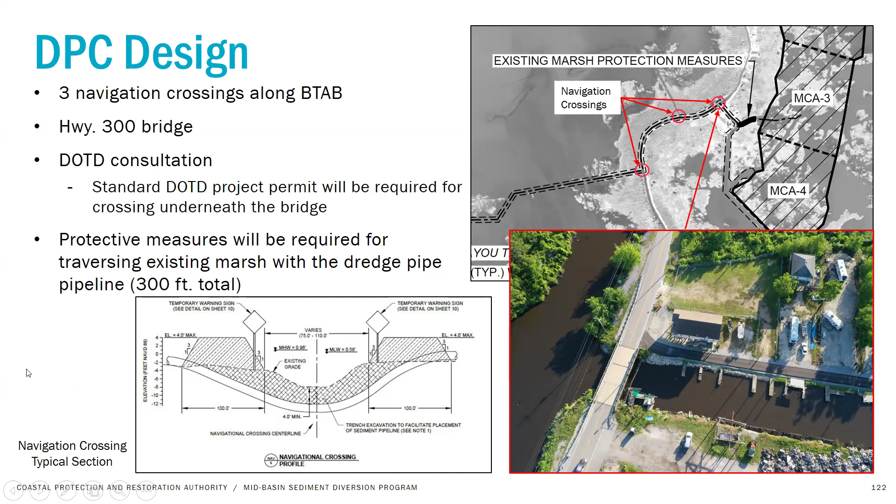Lastly, the schedule. For phase 2, we were approved for funding in January of this year, Q1 of 2024. We anticipate applying for a construction permit this summer, Q3 of 2024. We anticipate advertising for bid in Q3 of 2025, and the construction duration estimate is 554 days.

Are there any questions?

Thank you, Rule. I see none in the chat box yet. For the folks in the room, a little bit of time to ask any questions. Hearing none, we do have one final construction project presentation coming up.

We're going to have Mr. Kyle Galloway from GIS Engineering come present on the TE 134 West Fourchon Marsh Creation and Nourishment Project.

Thank you, John. Good afternoon, everybody. My name is Kyle Galloway with GIS Engineering, and I'll start by apologizing for my voice. I was at the LSU baseball game Saturday night and lost it there, but I'm just glad that I wasn't there yesterday. So thank you all for having me.

I'm excited to present this project on behalf of CPRA and the Greater Lafourche Port Commission. The project will include 3 marsh creation areas. You'll note on the map that the numbering is out of order. MCA 3 was added later on the north side of the project, and that's a bid additive. We'll get into more details on that in a minute.

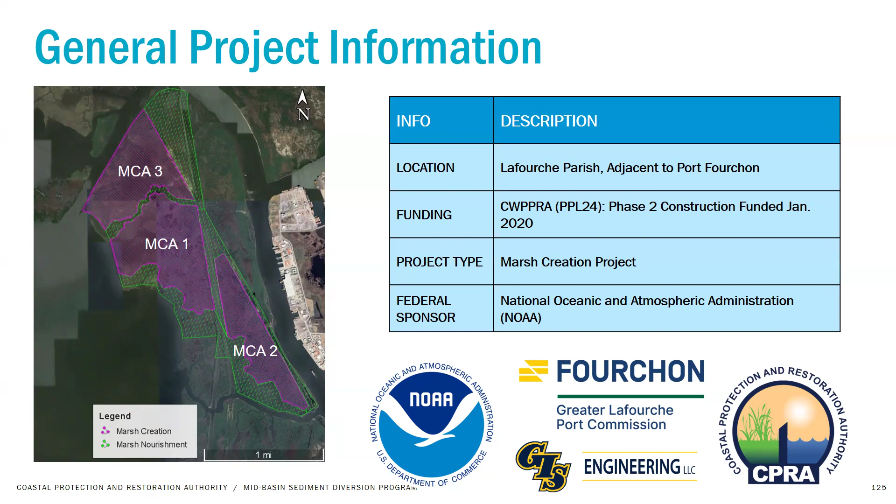The project will include 814 acres of marsh creation and 458 acres of marsh nourishment. The borrow area encompasses Belle Pass, Bayou Lafourche, the flotation canal, and several slips within the port. Note that the southern end of the borrow area extends a little over a mile past the jetties.

Currently, we're finalizing the bid package. We expect to be complete with that in 2 to 3 months, and then putting this out for bid mid to late summer.

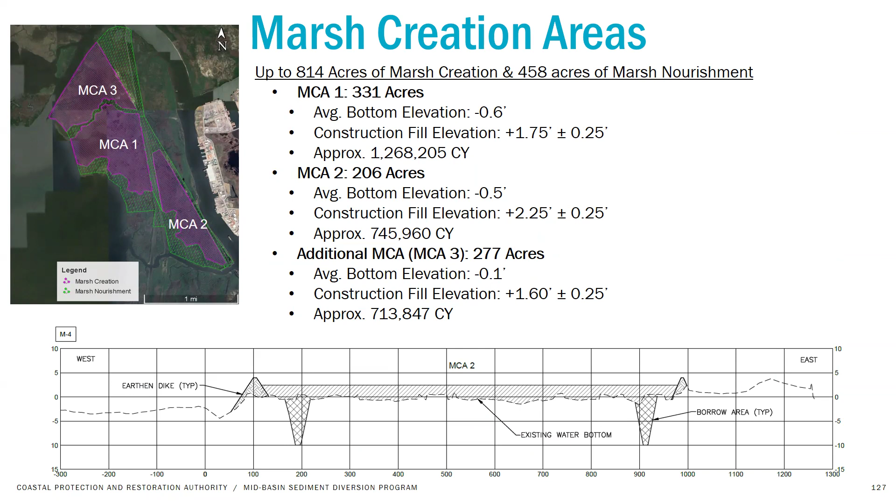For earthen containment, all of the ECDs have a crown width of 5 feet and a bench distance of 25 feet. The crown elevations and side slopes vary depending on the marsh creation area. They're all interior borrow, and they'll be paid by linear foot. There will also be some gapping of the dikes after the marsh creation areas are accepted.

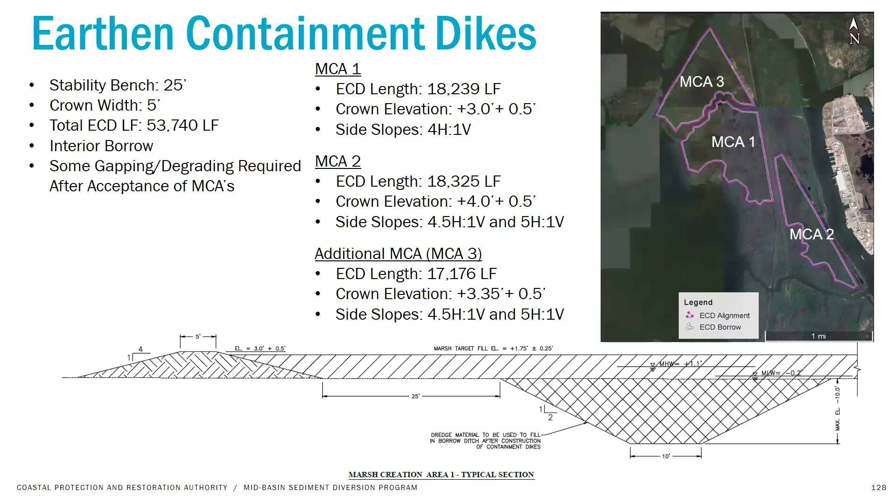On the borrow area, as I mentioned, Belle Pass, Bayou Lafourche, flotation canal, and the slips, we don't expect to need the entire borrow area. And it is largely a federal channel, which is maintained by the Corps. Our proposed dredging depth is minus 33. And there is one pipeline conflict, the Chevron pipeline, which will have a 200 to 400 foot wide buffer. That's one of the little details that we're still working out.

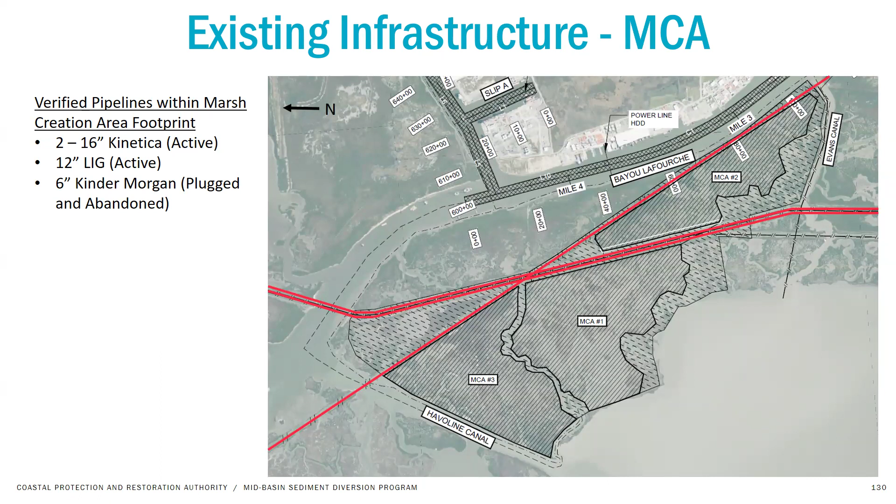Speaking of pipelines, there are a few pipelines crossing the marsh creation area: 2 active 16-inch lines, 1 active 12-inch line, and 1 abandoned 6-inch line. And then, as I mentioned, in the borrow area, we have that one conflict with a 10-inch Chevron pipeline. There's 3 other pipelines. One has been removed, and the other 2 are deep enough to avoid a conflict.

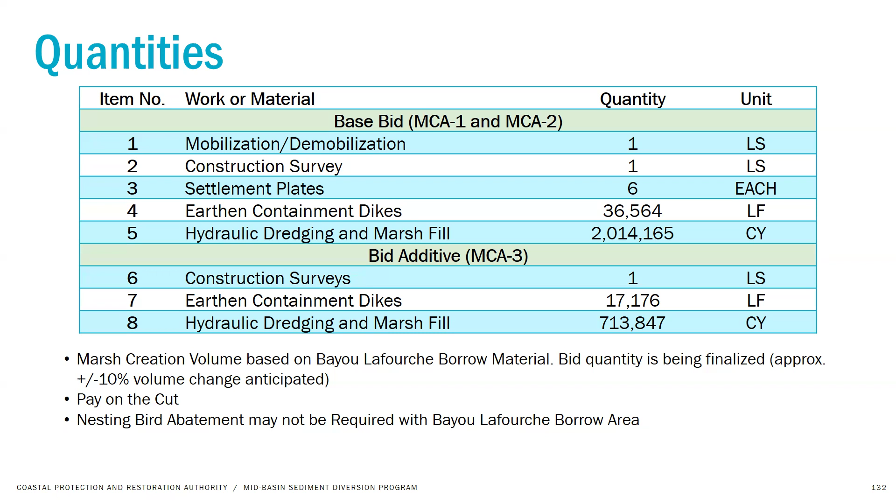So, schedule: as I mentioned, we are finalizing the bid package now and anticipate advertising 3rd quarter of this year. And we're expecting a contract duration of 450 days. And unless there are any questions, that'll close it out for this portion. Yeah, we'll take a couple minutes to see if there's one in the room here.

So will there be any priority of what channels are excavated within this location? Andy and Amelie are nodding yes. So you can just repeat the question aloud. Gentleman's question was, is there any prioritization of the different channels? And I think you meant slips too, up near the port, right? Yeah.

Just because it is a channel. And it's a marsh creation project. The borrow area is in the channel, correct? So you're required to meet elevations, correct? Yes. Just to repeat the other gentleman's question, I know you work for Great Lakes, the question was, is it a requirement in order to meet certain elevations for the channel deepening? And the answer is yes.

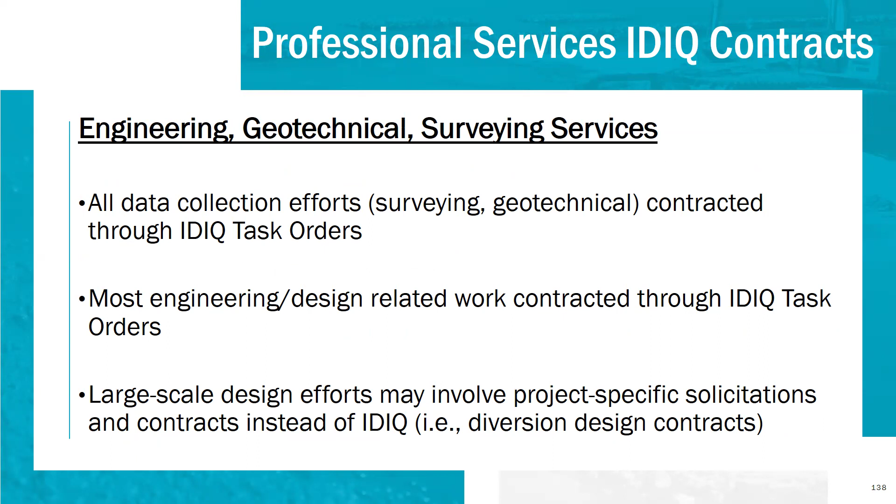So as I mentioned, these contracts that we're currently operating under today started in January of last year. They will end in December of next year, so I would say in the middle of 2025, maybe even as we get into this time next year, you'll start seeing some information on that solicitation. It is a process to get the procurements approved, the solicitations approved, and then the procurement process does take some time. And as you guys who worked for us know, it's always our goal to not have any delays through this process.

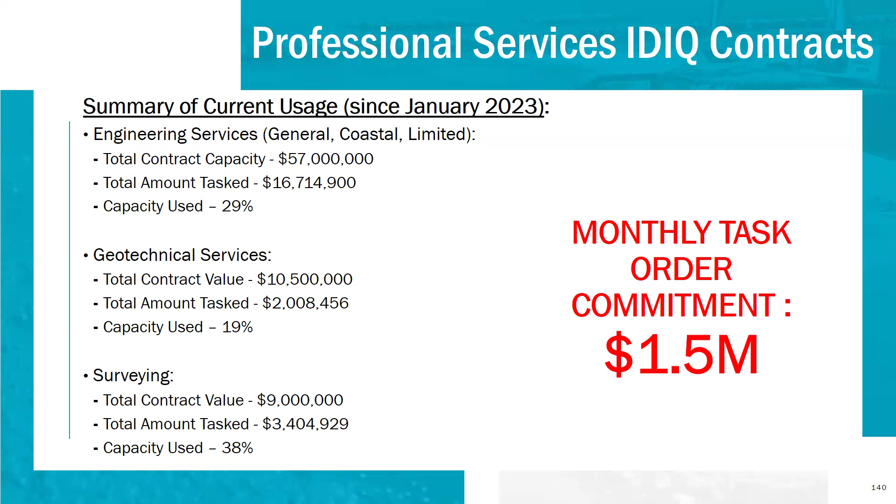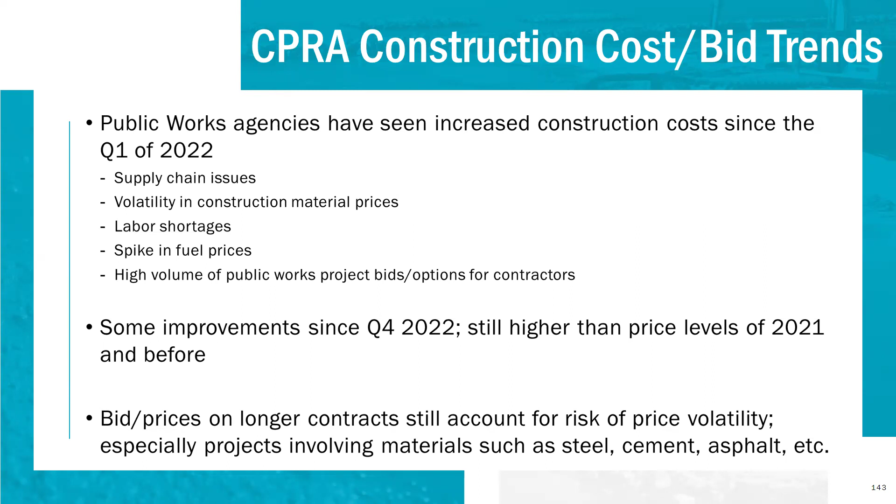Construction, and if you've seen me present in the last several months, you've probably seen some of these slides. I did update the numbers with our most recent bid data, but as you guys know, starting in the first quarter of 2022, cost estimating and bidding became a very dicey thing for public agencies as well as any other agency. But you can see here, particularly on longer contracts, as you guys saw today, we did have several 400- or 500-day contracts. It did become a risk in terms of price volatility, supply chain inflation, etc.

A couple projects were so far off budget they were not awarded. So what that tells you is of the 17, 15, although a lot of them were above budget or above the engineer's estimate, we were able to reduce scope or find additional funds to award those projects. So I do think that is our commitment to moving forward our mission and getting creative in some cases to get these projects moving forward.

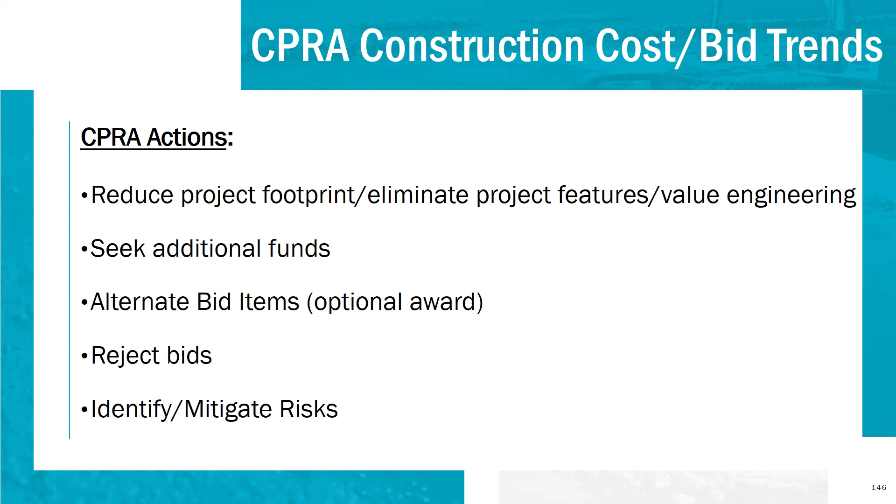We have begun to utilize our alternate bids more than we ever have, up to 3 in most cases. That gives us the ability to at least award the base and move as quickly as possible into construction. As you saw, we've rarely rejected bids for the most part.